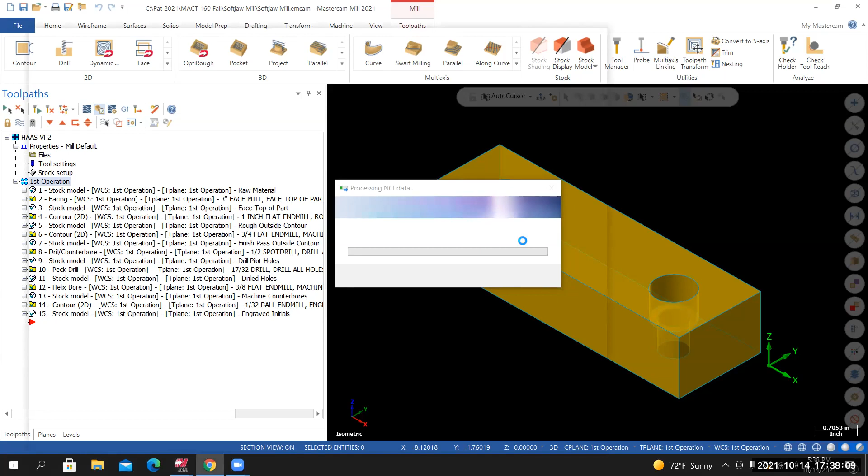I'll select Verify. Now, before you do that, make sure there's green checks next to everything. I'll run Verify. Takes a moment to open up. And once it opens up, we'll make sure that the stop condition collision is turned on.

And it's looking a little odd to me. Hold on one second, I think I'm frozen up. There we go. All right, so Verify has opened up. Make sure stop condition collision is turned on. I'll increase the precision a little bit. Just be aware that this can slow your computer down. I'll select play.

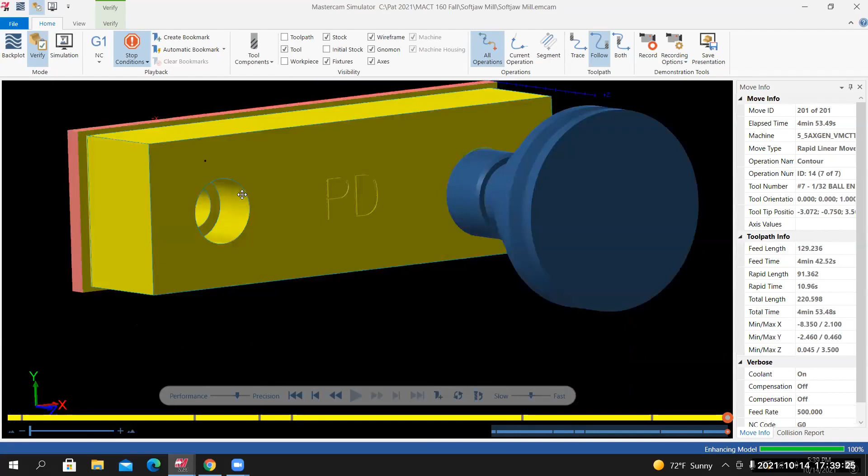Okay, so it appears as if we've got as far as engraving our initials in the part. What we'll need to do now, just at a quick glance, is break the sharp edges that we created with the toolpaths we've programmed. And we're also going to create a chamfer on this edge, the edge between the drilled hole and the bottom of the counter bore.

But before we do that, let's reference the project page and see what we're instructed to do. So under creating toolpaths, first operation, that's what we're currently working with, it says use the helix bore toolpath to create the 0.813 counter bores in the part. We've already done that. Step 9, use a contour toolpath to create the engraved initials. We did that. Step 10, use a contour 2D chamfer toolpath to create a 0.03 by 45 degree chamfer on the edge of the hole in the bottom of the counter bore. Okay, so that's what I was just talking about.

I'll go back into Mastercam. I still have Verify opened up, so I'll close out of Verify. We're going to create that chamfer. Now, this isn't called out on the blueprint, I'm just giving you instructions to do this. We're going to create a 30 thou by 45 degree chamfer on this edge and on this edge.

And we're going to use, let's check the tool list. We're instructed to use a 1/4 inch chamfer mill, 90 degree included angle, 2 flute. And they also identify the tool holder that we're going to use, and it's going to have a 1 inch tool projection.

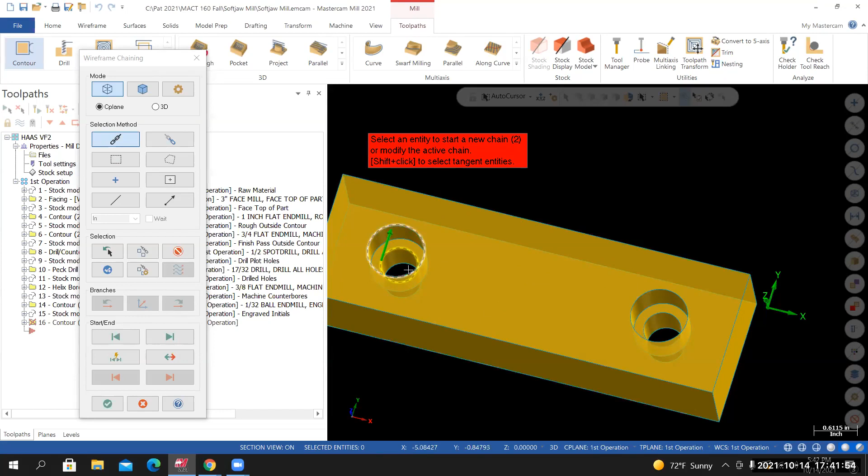I'm going to select this circle and this circle. I'm selecting wireframe geometry, and I will select it right around the 1 to 2 o'clock position, left click. Now, when we use a contour toolpath on what's referred to as an internal feature, a pocket or a hole, we want the chain to go in a counterclockwise direction. Mine's currently going in a clockwise direction. To change that, I'll use this icon here, reverse.

And then I'll come over here and I'll select this circle at around the 8 o'clock position. And then, because of the way I selected it, it is going in a counterclockwise direction. So I need both chains to go in a counterclockwise direction. Once I select the chains, I'll select OK, and that'll bring up the parameters for this toolpath.

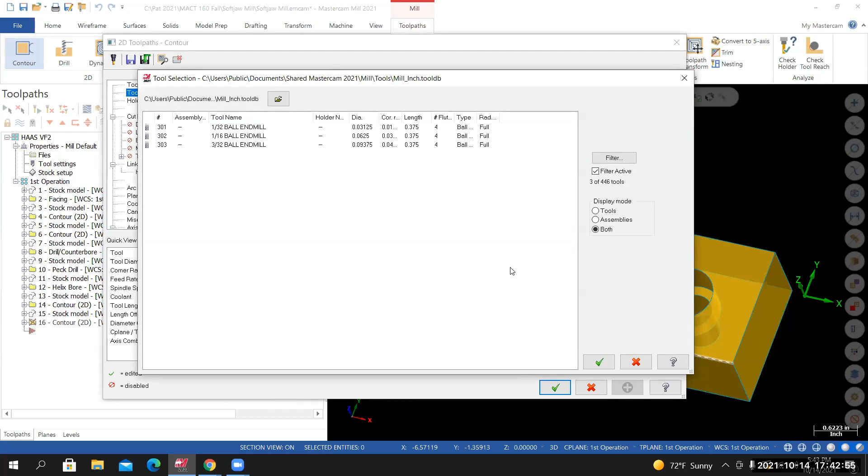We'll start by going to the tool list, so select tool. We're going to add that 1/4 inch chamfer mill to the tool list. So I'll select the select library tool icon. I'm sorry, Professor, I'm a little screwed up on the selection step. I'm not sure if I'm on the right level.

You're not sure if you're on the right level. The level doesn't matter, but what does matter is that the wireframe from solid level is visible. Can you share your screen with me? That was it, I had the wireframe from solid level invisible. Yeah, make it visible, and then you will be able to select those circles. I got it now, thank you. All right, perfect.

Okay, so select those 2 chains, and then once you select OK, it's going to bring you to the toolpath dialog box, and then go to the tool list. We're going to add that 1/4 inch chamfer mill to our tool list, so I'll select library tool.

My filter is still active from the previous contour toolpath where we created the initials, so I'll select the filter icon. This time I'll deselect all tool types and select chamfer mill. Now the chamfer mill upper right corner looks a lot like the center drill or spot drill, so select the chamfer mill.

For the tool diameter, I'll set it to ignore. I believe there's maybe 6 or 7 chamfer mills coming out of this library, so chamfer mill, ignore, will show us everything in the library. I'll select OK.

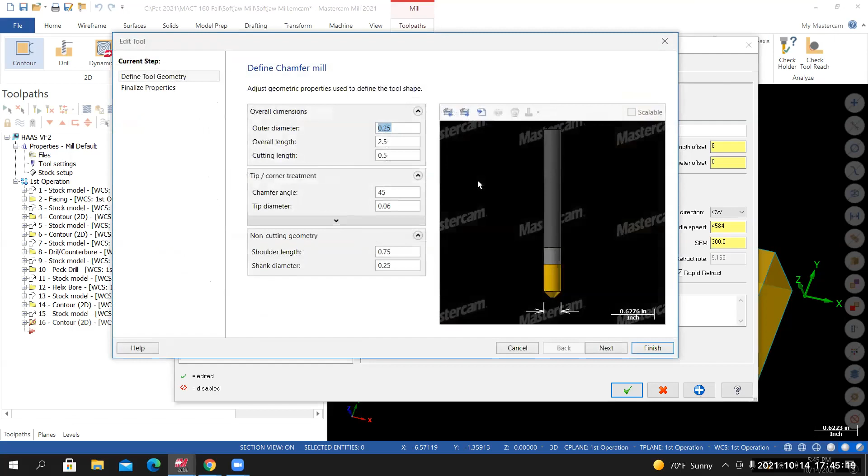Depending on the chamfer mill that you have, you're going to want to match the tip diameter to whatever the tool manufacturer you're using has. The ones I have at work, at a quick glance, look like they come to a sharp point, but if you look with a magnifying glass or optical comparator, there's around a 10 thousandths flat at the very bottom. So let's set the tip diameter in this particular case to 0.01.

At a quick glance it doesn't look like there's anything there, but if you zoom in you can see there's a small diameter at the tip. That'll be all the changes we make to this page. I set the tip diameter to 0.01. From here, I'll select next.

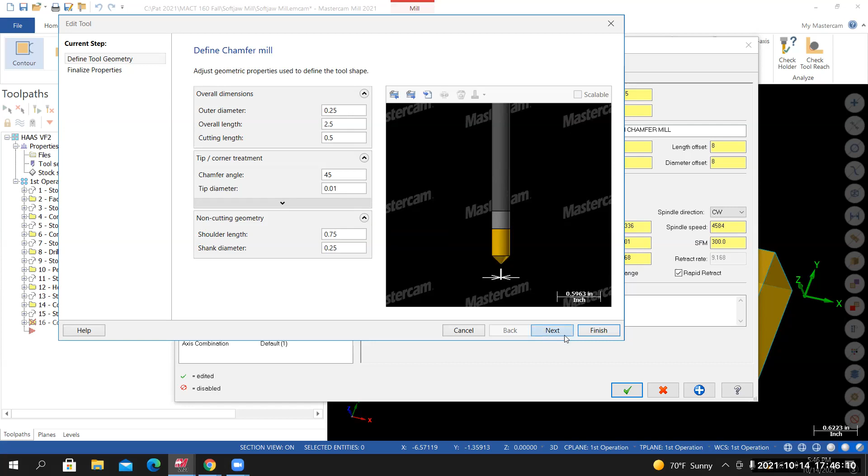According to the tool list in Canvas, this is a 2 flute, so let's set the number of flutes to 2. If I calculate the RPM, you can see that it maxes out at 10,000 RPM. That's the machine's limits, or the high limit for the machine.

From here, I'll select show more options. I'll select coolant, then set the flood coolant to on, and select OK. That'll pretty much complete everything I need to change on this page, so from here I'll select finish.

Now this spindle speed is not matching the one that we just calculated. I'll have to research that, but this will work. For the FPT, set this equal to 1% of the tool diameter. The decimal equivalent is 0.25. So 0.25 times 0.01, it's calculating my feed rate at 22.92.

Let's set the plunge rate to half the calculated feed rate, so 22.92, divide that by 2. I've got rapid retract selected.

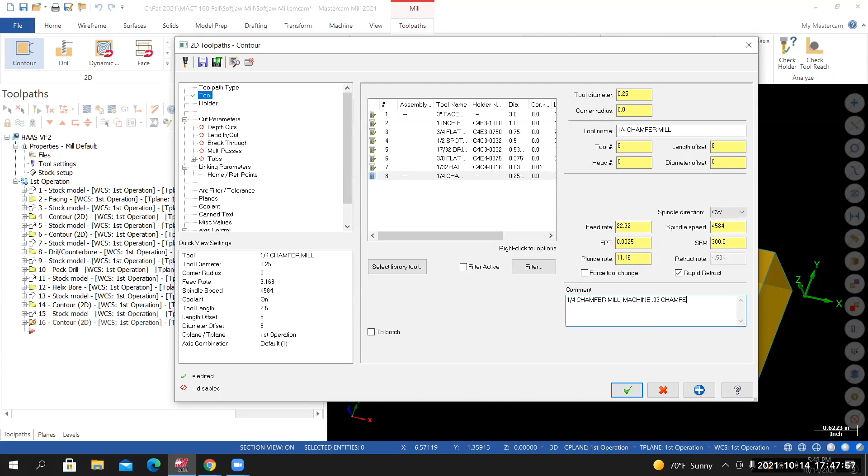In the comment field, I'll borrow the tool name, paste it down here. We'll say machine, all caps, 0.03 chamfer. Let me double check the instructions on that just to get the values correct. Yeah, so 0.03, that matches. That'll complete all the changes I need to make to this page.

From here, I'll go to the holder. This will be a Cat 40 ER32, so I'll open up the Cat 40 tool holder library. I'll select Open Library. CT40 inch, open it up.

According to the tool list, we're instructed to use C4C3-0032. And then we're also instructed to set the tool projection to 1 inch. That'll complete all the changes we need to make on this page.

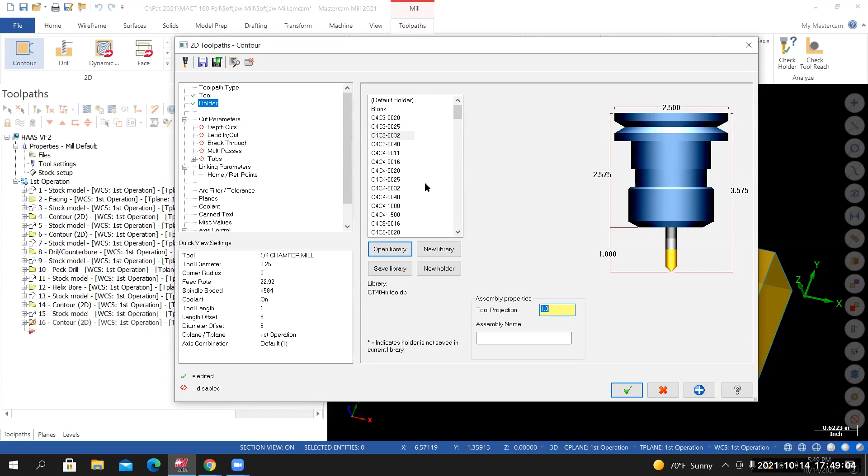From here, go to cut parameters. Compensation type, let's set it to... I'm sorry, let's set it to wear. Compensation direction would be left, so type is set to wear. Contour type, expand this menu, set it to 2D chamfer.

For the chamfer width, set this to 0.03. For the bottom offset, set this to 0.025. Now you got to be careful here, it's not 0.25, it's 0.025. So chamfer width is 0.03, bottom offset is 0.025.

I've got stock leave on wall set to 0. I have stock leave on floor set to 0. I'm not using depth cuts. Lead in, lead out, let's turn this back on.

And I've got mine set to the default values. I got 25% for the line in, 25% for the radius, and I have the same values carried over to the exit. These are my default settings.

Breakthrough, make sure that breakthrough is turned off. Multi-passes, we could use multi-passes, but I'm not too concerned about the surface finish on this. This is just clearance for the underside of a socket head cap screw, so I'm just going to leave multi-passes off.

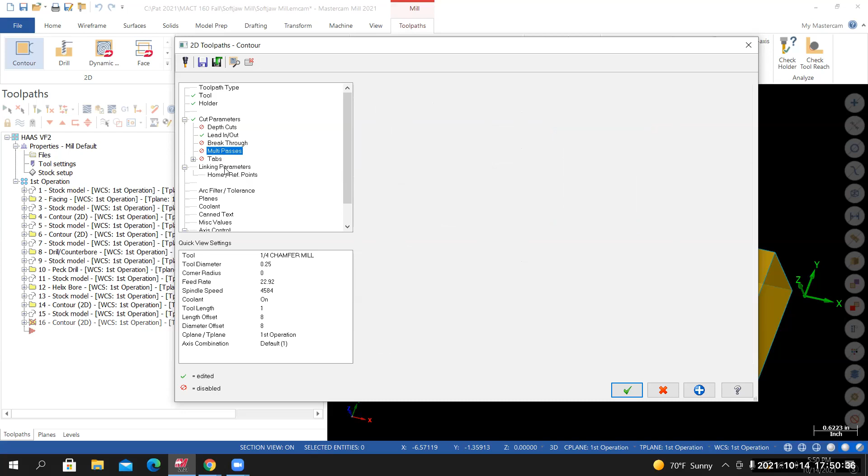I'll go to linking parameters. Now, most of these values are carrying over from the previous toolpath or the previous contour toolpath. I'm going to turn off retract, feed plane set to 0.1 incremental.

Top of stock. I'm going to set the top of stock... I'll select that. But actually what I'm going to do is set it to 0 incremental.

And then I'm going to set the depth to 0 incremental. What happens when we set both of these to 0 incremental is it uses the Z position of the geometry that's driving the toolpath to determine where it's going to position the tool in Z.

With that said, I'm actually going to activate retract again. We're inside of a pocket, and I want to make sure I'm well clear of it before I move over in the X and Y axis. So I've got retract set to absolute.

Select the retract icon, select the top of the part, and then add 0.25. I'll do that again: for the retract, set it to absolute, select the retract icon, and then pick something that represents the top of the part. That's 1.48 - select next to it and type in plus 0.25, hit enter.

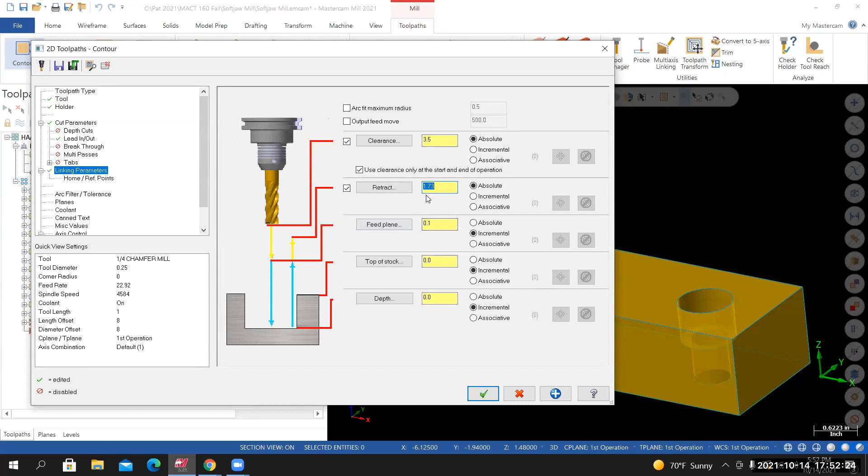Remember, this is an absolute value, relative to the current coordinate system. So when it retracts and repositions itself from one hole to the next, it's going to be at 1.73 inches relative to the current coordinate system.

So here, from here, we're good. Let's select OK.

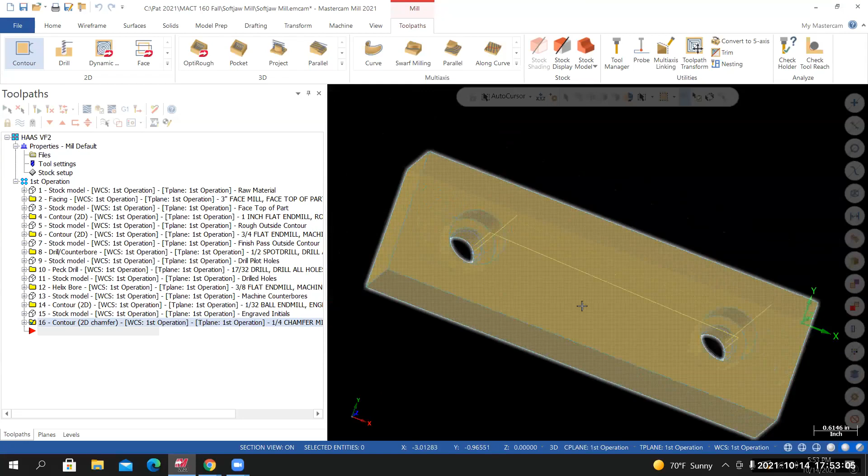I'm looking at the toolpath. We start here, we descend into the pocket, we have one pass around the bottom edge of the counter bore. It retracts, repositions itself to the second counter bore, descends, and then machines the chamfer. I don't see any issues with this toolpath.

The lead in and lead out, you want to make sure that's happening where there's no material, so it's on the inside of the hole - remember, we've already drilled this out. The same thing's happening over here. If you see the lead in and lead out arc move inside material, the chain is going in the wrong direction, and you'll have to flip a few things.

So from here, if I select just that toolpath, I select backplot. I can see the tool. I'll select play, speed it up a little bit. I think that looks good - I don't see the tool moving into the material. So from here, I'll exit out of backplot.

I can toggle up the display of this toolpath - I'll select this icon here, toggle display - looking at it from an isometric view, and I'll fit the screen. Now from here, make sure you save your work.

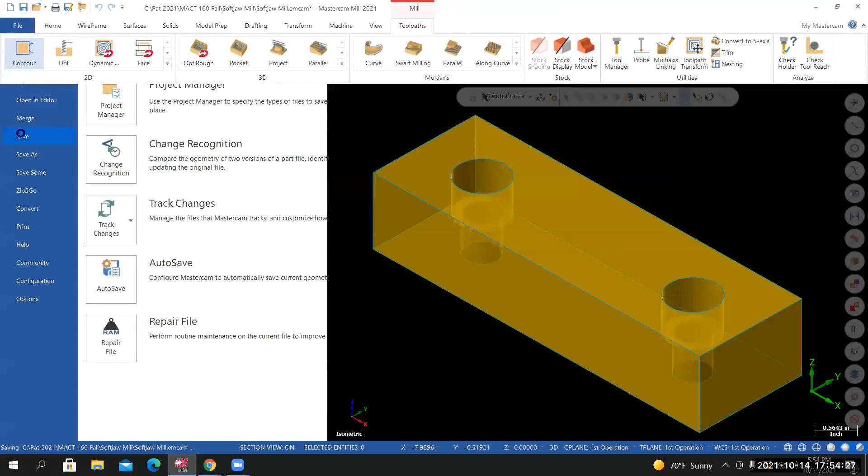We're going to run it and verify. I always recommend saving your work prior to going into verify. Select the entire first operation toolpath group and then run verify.

Stop condition collision is still turned on. I'm going to activate the color loop - that will assign different colors to the surfaces machined by different toolpaths. If I go to the verify tab, select the verify tab, and then select the color loop icon. From here, I'll select play.

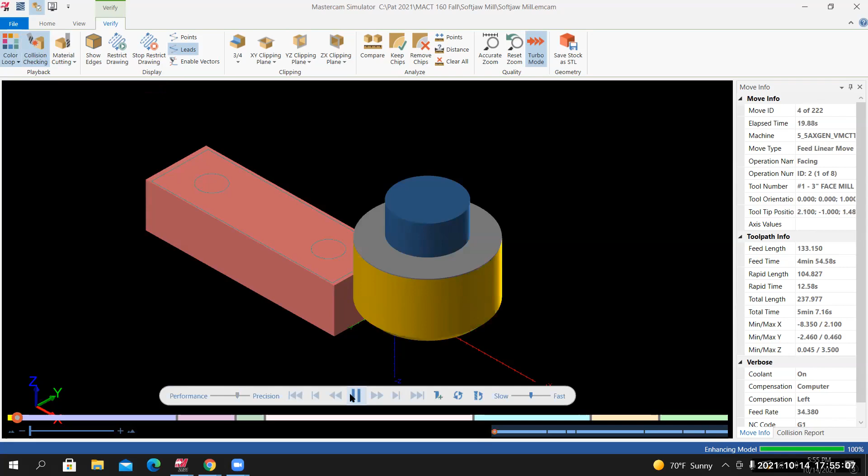Now, if I zoom in and tumble my view, into one of the counterbore holes, you can see that 30 thou by 45 degree chamfer at the bottom of the counterbore. That's what I want - that looks good, I don't have any collisions.

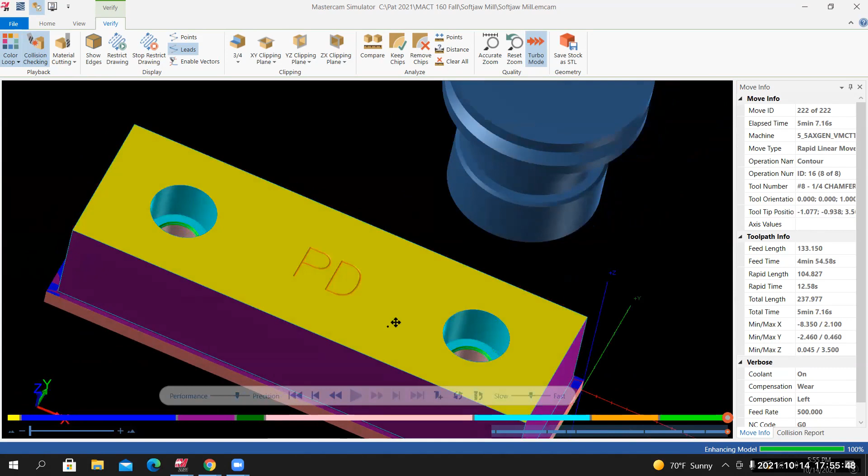The next thing we'll do is use a similar toolpath to break the sharp edges on the outer edges of the part and on the inside edges of the counterbores. So this looks good - I'll exit out of verify and save my work again.

So now that we've created the 30 thou chamfer at the bottom of the counterbore holes, let's create a stock model that reflects everything we've done up to this point. Once again, make sure the insertion arrow is at the very end of your toolpath group. Go to the toolpaths tab, in the stock section, select stock model.

Let's start by giving it a name. We'll call this 0.03 chamfers.

For the initial stock shape, I'm using a stock model - let's create the stock model, or the last stock model we did prior to this toolpath. It'll be the engraved initials. From here, go to the source operations, and I'm going to select the contour toolpath we just created - this is the 2D chamfer toolpath. I'll select OK.

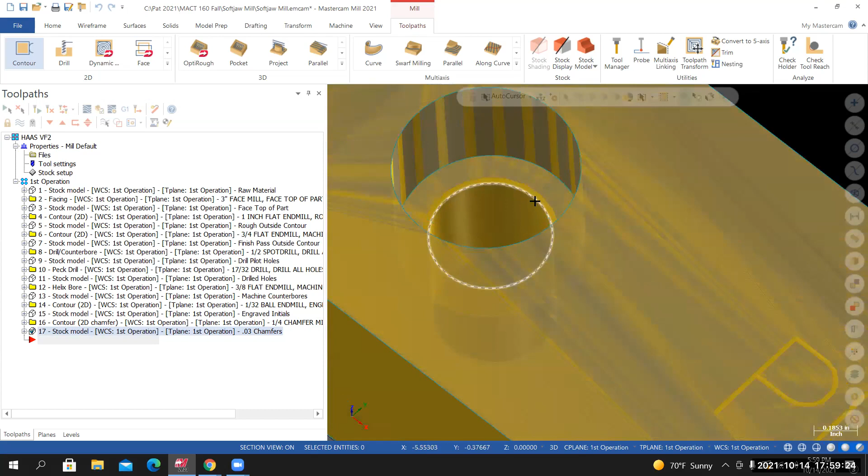Now, as the stock model starts to get closer and closer to the solid model or the finished model of the part, it becomes difficult to see what's actually going on with the stock model. This one's taking a moment.

If I zoom in, I can almost see the chamfer, but just to be safe, I'll go to the levels manager and make the solid model level invisible. Now if I zoom in, you can see the chamfer - I got the 30 thou chamfer on the edge.

And this is what we're actually going to see at the machine after that chamfer mill machines those chamfers. So once you verify that the stock model is correct, I'll make the solid model level visible again, and make the stock model level invisible, toggling the display of the stock model off.

I'll save my work, go back to the project page, and let's see what we're instructed to do next.

Step 10, or actually we're moving on to step 11: use a contour 2D chamfer toolpath to break all sharp edges created by the first operation. So everything we did so far is considered the first operation.

What I'm going to do is copy the chamfer mill operation that we just created, and make a few changes to it so that it works for all the sharp edges that we want to break.

Back inside of Mastercam, left click on the contour 2D chamfer toolpath that we just created. Make sure that you only have a green check next to that toolpath. Once you have it selected, right click on it.

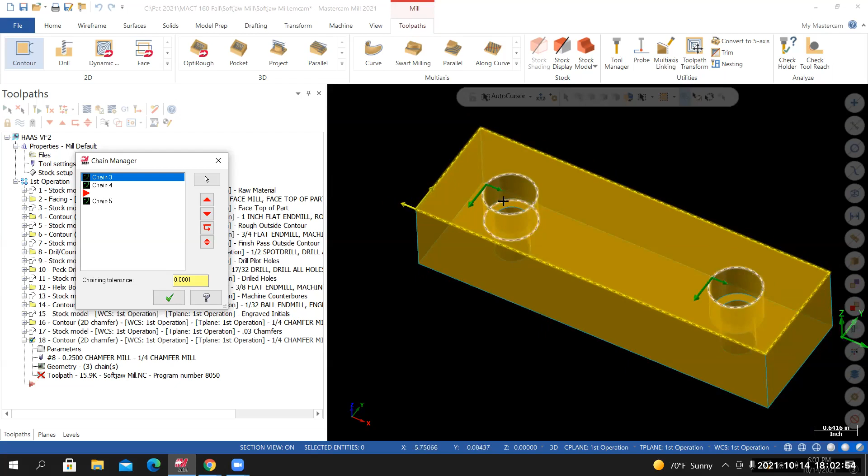So for the external feature, we want the chain pointing outboard. And for the two internal features, we want the small arrow pointing inboard. So mine are correct. From here, I'll select OK.

Now we're not seeing anything because we're modifying an existing toolpath. We already updated the geometry, so go to parameters, then linking parameters, then cut parameters.

Where it says chamfer width, let's reduce this. We're just breaking the sharp edge. We don't want to put a large chamfer on the edges that we have selected. So set this to 0.01.

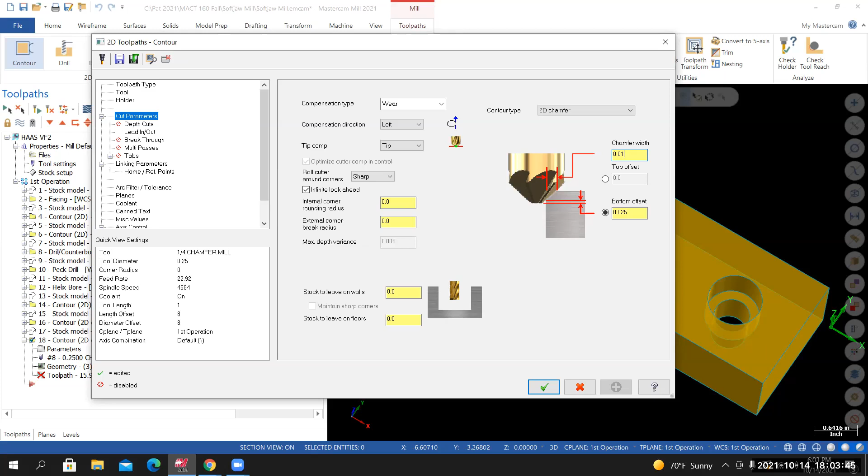And that should do it. If I go to the linking parameters, you see how these are set to 0 incremental for both the top and the depth. Once again, it's going to reference the selected geometry that's driving the toolpath. Once we selected the new geometry, that hasn't really updated, but because of these settings, the new geometry will work just the way it is. It's going to reference the Z position of the newly selected geometry.

From here, I'll select OK. I'll need to regenerate this toolpath, so I'll select regenerate all dirty operations. In this case, that'll work. Once it regenerates with just that toolpath selected, run backplot.

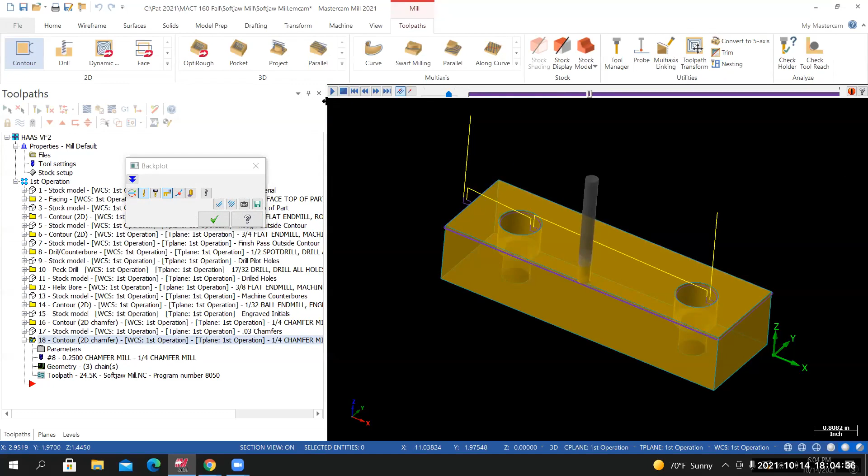Once again, you want to make sure that the tool is on the correct side of the feature that's being machined. From here, I'll exit out of verify and save my work.

Looking at it from an isometric view, zooming out a little bit, I'm going to select the entire first operation toolpath group. Now, the one thing that we're going to do after we verify this or run these toolpaths and verify, we're going to save that machined model as an STL file. And that's going to become our stock for the verify of the second operation.

So all toolpaths are selected. I'll select verify.

So when I go to hit backplot, it is bringing up all the operations when I only have number 18 selected.

So toggle off all display, toggle off this icon right here, and then select just that last toolpath. Got a green check next to just that one, right?

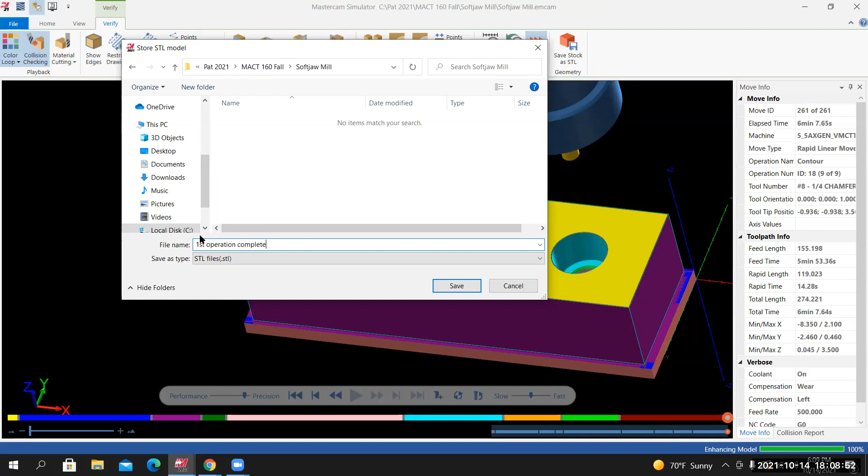I'll select save. Now this will sometimes take a moment, so be patient. It's going to create the STL file, and once we have the STL file created, we can reference or import it for the stock for the second operation verify. I'll show you how to do that here in a moment.

All right, so once it's done saving, you can exit verify. That completes everything we need to do for the first operation.

If I go back to the project page, let's see here. It says we just completed step 11, step 12: create the NC file using the post selected operations icon, and then create the STL file that reflects all the toolpaths from the first operation. This file can be used in verify for the second operation.

So we jumped ahead to step 13, and I'll need to make that change. That's actually step 13. Let's backtrack and create the NC file.

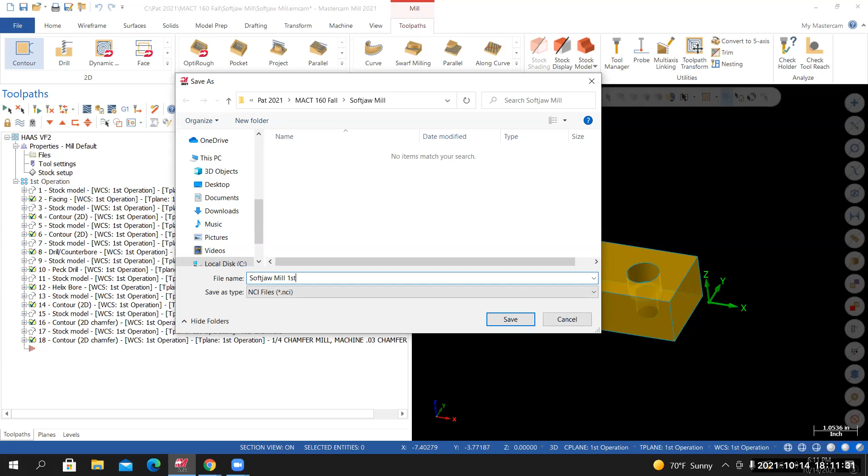And then I'll name the NCI file, well that was the NC file, so I'll name the NCI file and NC file the same way. So Softjaw Mill first operation.

And once you save the NC file, it's going to open up Code Expert, and we'll see the NC file, which basically converts these graphical representations of toolpaths to a language that the machine will understand, G and M code.

So we'll call this 8050, and I'll take note of this because for the next ones, we're going to call it 80. This is 8050. We'll make the second operation 8051.

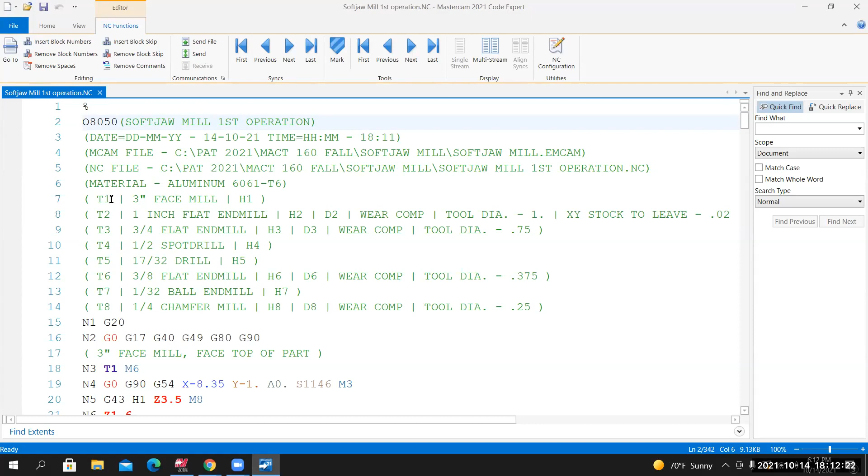So from here you can scroll through the code. This is the language that the machine understands and will basically be used to machine the first operation of the mill Softjaw. So from here, I'll exit out of the Code Expert.

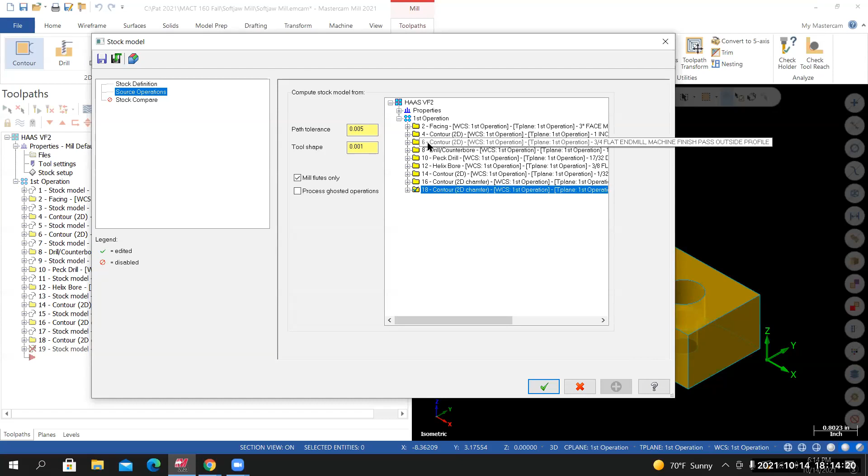Let's create the stock model that shows the first operation completed. So insertion arrow at the very end of the toolpath group. In the toolpaths tab, go to stock model. I'll call this one first operation complete. For the initial stock shape, let's use the last stock model that we created, which is the 0.03 chamfers. And for the source operation, select that chamfering, the last chamfering operation that we created. Select OK.

You zoom in, you can barely see the chamfers through the solid model. What I'm going to do is look at it from an isometric view and fit my screen.

What we're going to do, first off, let's visualize this part sitting in the vise. We're holding onto this gray area, which is the excess material we're holding onto from the first operation. What we're going to do now is flip the part over. This face that my cursor's on is going to go on top of the parallels, into the vise, down. We're going to clamp on this face and this face, and the material that needs to be removed will be facing up. So we basically got to flip the part over.

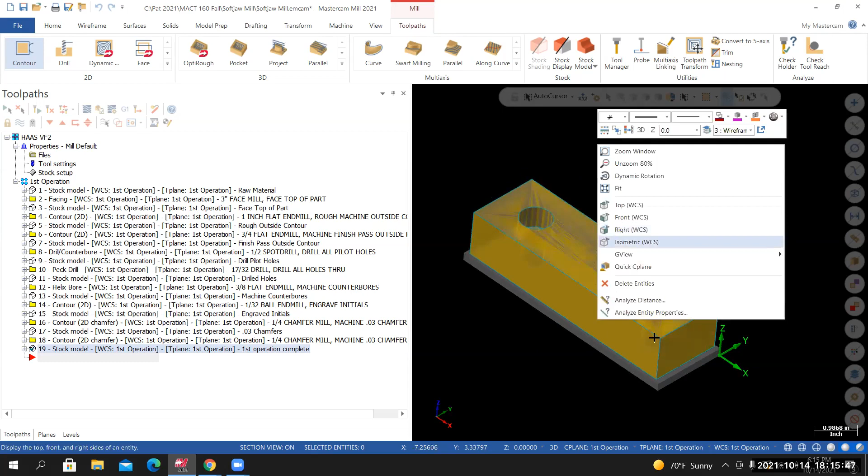This is what I want you to do: look at it from an isometric view, zoom out a little bit. We're going to rotate this about the y-axis, pivot about the y-axis. Hold the Y key down, then hold your scroll wheel down and move your mouse. I'll do that a couple different times.

We're tumbling the view, not the part, so that the material that needs to be machined is facing up. The old coordinate system is now upside down, at the upper left side of the new orientation, and that's what I want. I'll do it one more time: from a default isometric view, hold the Y key down, press the scroll wheel down on your mouse, and move the mouse. It's rotating the view about the Y-axis. Now the coordinate system should appear at the upper left corner, and the Z-axis is pointing down. So we've basically flipped the part over.

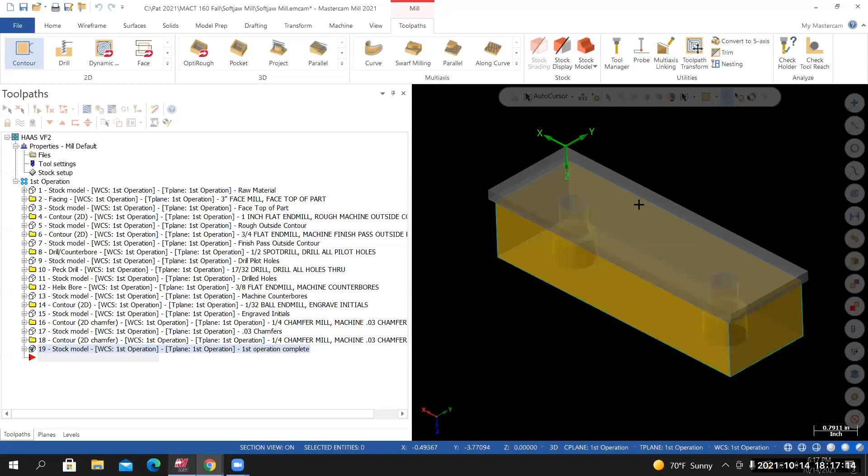You need to visualize unclamping the vise, flipping the part over 180 degrees, and then clamping it down again. We're going to need to create a new coordinate system. If I go back to the project page, let's see here: turn part over. Yep, so we're still on step one. I no longer need to see, I guess I could keep it visible, the stock model.

Let's create a new coordinate system and we'll call it the second operation. Go to the planes manager. To create a new plane, select the green plus sign to create a new plane, and from the drop-down menu select from solid face. Mastercam is prompting us to select a flat solid face. Select the top face. I'm selecting it right here, and you'll see that coordinate system appear.

You could scroll through the different options. Z will always be perpendicular to the selected flat face, but the first option is the one that's working for me, so I'll select OK. That brings up the parameters for the new plane we just created. Call this one second operation.

Don't worry about the origin. I'm going to move this to this corner. I want the coordinate system on machined surfaces or machined edges.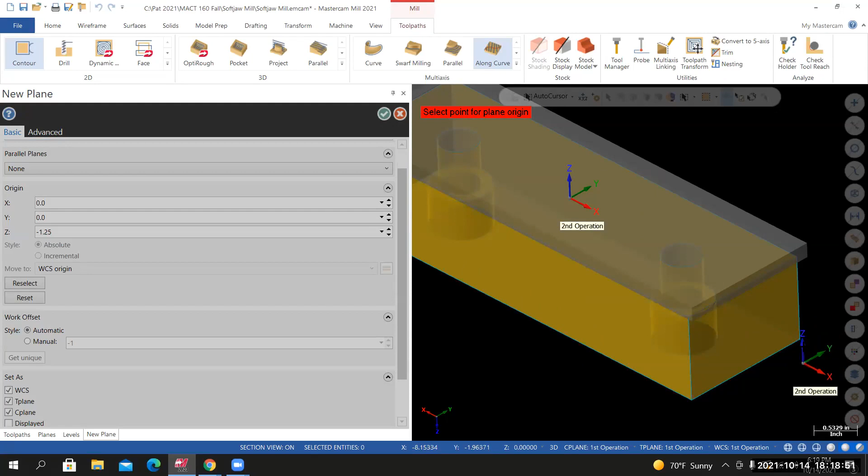So we're still in the parameters for the new plane. Select, reselect. When you move your cursor to the graphics area, you'll see the coordinate system attached to your cursor. I'm going to let my cursor lock on to this edge or this endpoint right here. When I see it snap into position, left click.

So now you can see positive X is going to the right, positive Y is going forward, and positive Z is going up. That's the orientation or the direction of our axes on our CNC mill.

From here, I'll save my work. And I'll go back to the project page.

So now we're moving on to step 2. It says create a new toolpath group and name it second operation.

I'll go back into Mastercam. Go back to the toolpath manager. Now, the toolpath manager is getting a little cluttered. We have a lot going on.

So once we're done with the first operation toolpath group, we can minimize it. If we ever need to get access or get back to the existing toolpaths, we can just expand it. But for the time being, I'm going to minimize it.

Now we're going to create a new or a second toolpath group. Be careful, because you can create toolpath groups within toolpath groups. That's not what we want to do right here. We want to left click on the machine group.

Machine group is a selected item, the Haas VF2. Then right click from the file menu, select groups, new toolpath group. And then name it second operation.

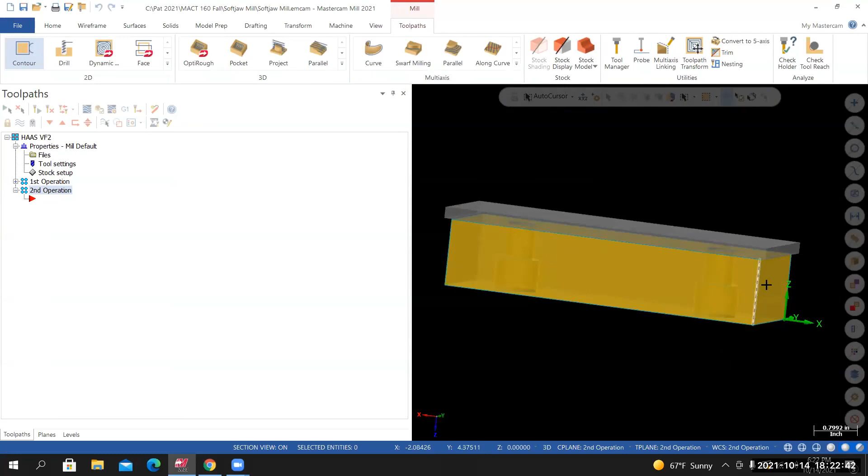So let's do this. We used a contour toolpath. We had a dedicated roughing toolpath where we use that 1-inch flat end mill. I'm going to remove this material, and I'm not too concerned about the surface finish, because everything that's in gray, everything that you're seeing above the part right here is all going away. We're machining all this away. I'm not concerned about the surface finish.

So what I'm going to do is copy a toolpath from the first operation toolpath group. Now we need to be careful when we do this. I'll expand the first operation toolpath group.

The contour toolpath, where we have the 1-inch flat end mill—this is the one that we're copying. So select the contour 2D with the 1-inch flat end mill. I have a green check next to just that toolpath.

Right click on it, copy. Be careful, do not cut. Right click, copy. Go down to the second operation toolpath group, right click, paste.

And I'll minimize the first operation again. I'll end up going back to it, but for now I'm just minimizing it. I got this copied toolpath, and we're going to need to change several things.

The first thing I would like to change, if I expand it, is what tool plane this copied toolpath is currently referencing. I'm giving you a hint—it's referencing the first operation. We need to change the construction plane. I'm sorry, we need to change the tool plane that this toolpath is referencing. Right now, the Z would be coming from underneath the part, the wrong direction.

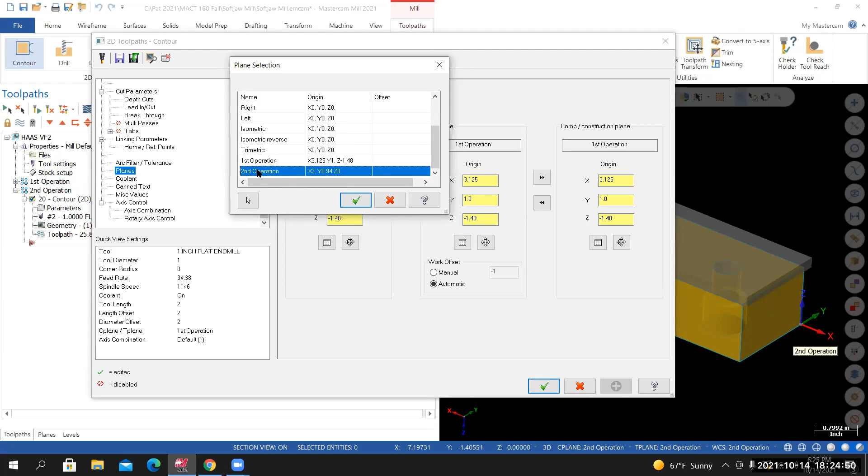Yeah, so mine's at the bottom. Select the second operation. When you select it, you see it become visible over here. So select the second operation, select OK. And now I'd like to carry this over to the tool plane and to the construction plane, so I'll select this icon and this icon.

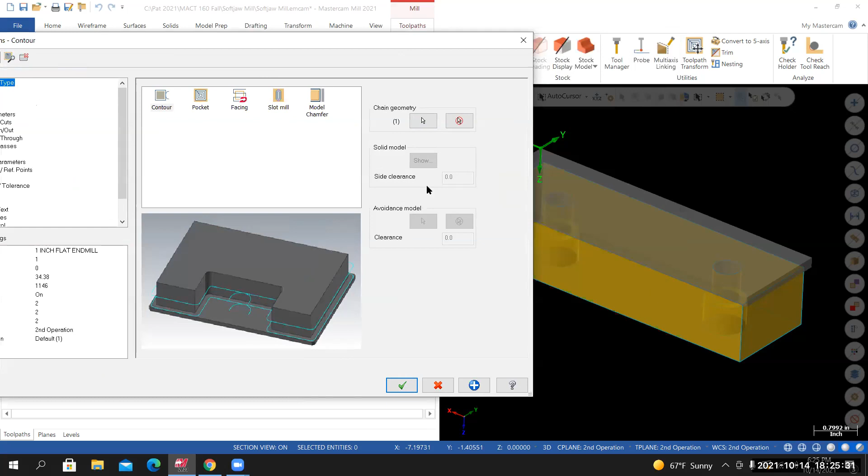From here, go up to toolpath type. We can access the chain geometry while we're inside of the parameters for the toolpath from the toolpath type page. So where it says chain geometry, if I select it, it brings up the chain manager.

Now remember, this chain is from the first operation. So what I'll do is I'll right click in this field, rechain all. I'm tumbling my view. And I'm going to select this edge right here so that the chain's going in a clockwise direction.

I'll select OK. The large arrow shows us the direction of the chain. The small arrow shows us which side of the chain the tool is going to be on. So I'll select OK.

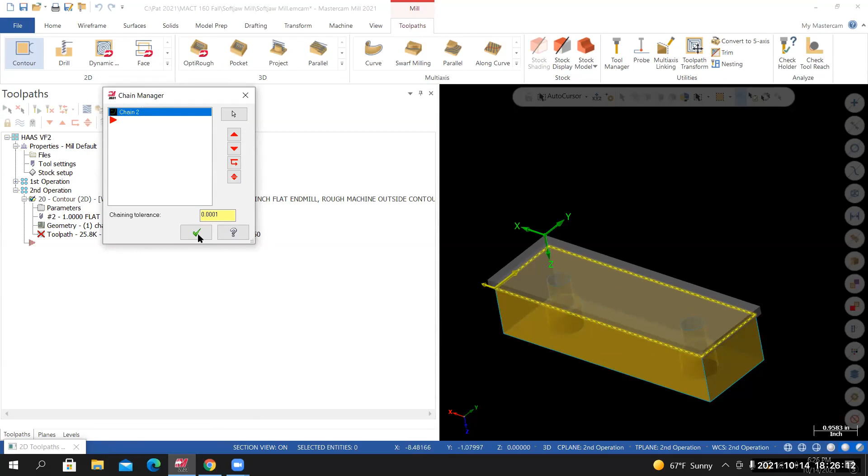And let's see here, let's go down to cut parameters. I'm leaving 20 thou on the wall. That's fine—all of this is getting machined away anyway.

Depth cuts, don't need it, so we'll turn it off. Lead in, lead out, the 25% default should work just fine. Breakthrough will probably be fine because we left 20 thou on the wall.

Multi-passes, don't need it. Linking parameters, we need to change something here, and remember these values are relative to the current coordinate system. Something's looking odd to me. Hold on. All right, it's all good.

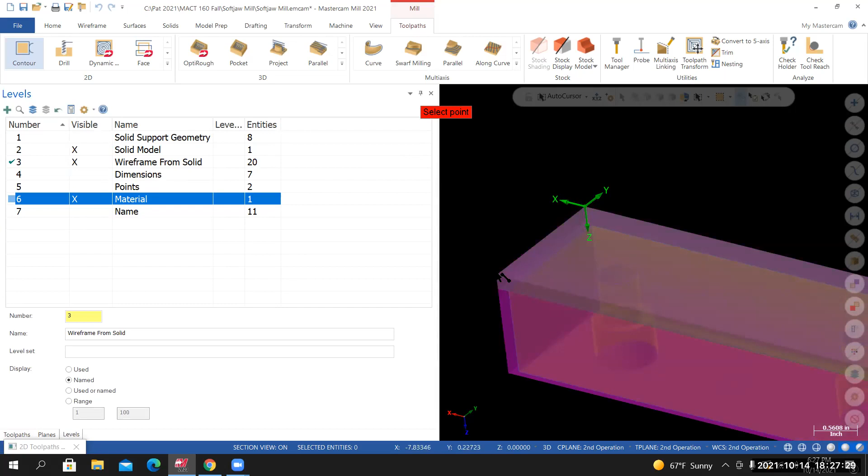So linking parameters, top of the stock. I'm going to select - it's not letting me select anything because we cannot select a stock model edge. So what we have to do is go back to levels, make the material level visible, lock on to what's now considered the top of the part. Once we flipped it over, this is considered the top of the part. So select it, and then for the depth, I'm selecting the top of the part now.

So I've got 1.48 for the top of the stock absolute, and then for the depth, I've got 1.25 absolute. That should take care of all the changes. Now remember, this is a copy toolpath, so a lot of the stuff has already been defined. From here, I'll select OK.

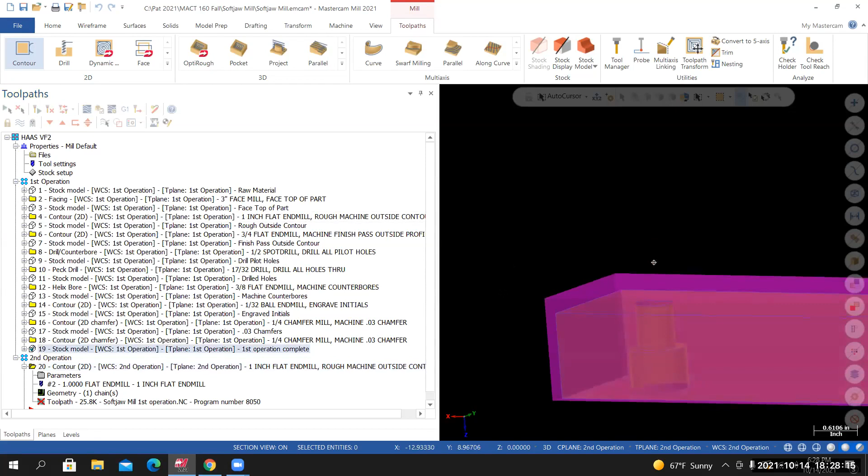I no longer need to see a stock model from the first operation, really don't need to see the material level. I'll need to regenerate this toolpath since we made some changes to it. We now have a red X next to it, so I need to regenerate all dirty operations.

Let's see what this toolpath looks like in backplot. I've got the toolpath selected, I'll select backplot. We're doing one pass at one depth of cut. If I select play, this is what we're getting.

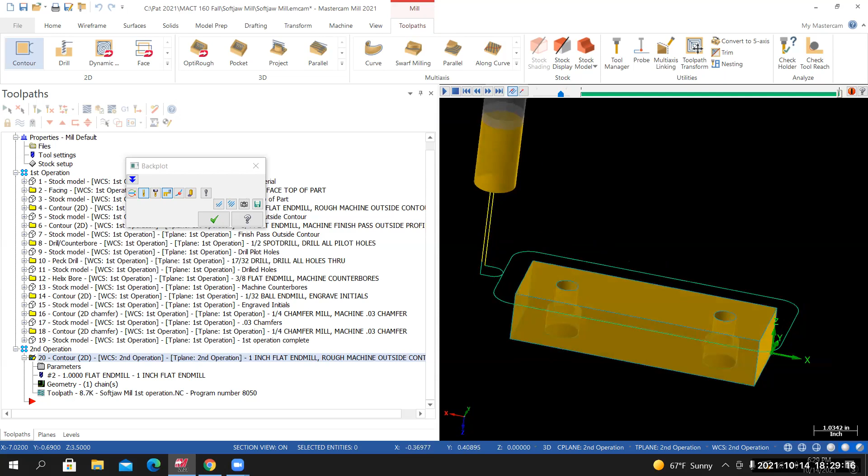It's just knocking off that overhanging material. That way, when we come by with a face mill and machine away the face, nothing has a tendency to overlap or get hung up and tear away as the face mill is cutting through it. This overhang wasn't that much, so it might not be a problem, but I'm just going to err on the side of safety with this.

So I machined away the extra material that was overlapping the finished walls. I'll toggle off the visibility of the new toolpath.

Before I run verify, I need to update my stock setup. Go to stock setup - stock plane should still be set at the top. This time, instead of a solid, remember for the first operation we had that solid we created, our material representation, so the majority of that has been machined away now. So what I want to represent the stock for the second operation is that STL file we created that reflects all of the machined operations from the first operation.

So let's go to File, select this icon here. Now we're going to navigate to wherever you saved that machined STL file. I'm going to go to my C drive, and I'm looking in this MACT folder. I've got a project folder called Softjaw Mill, and then I have the first operation complete STL file. I'll select OK.

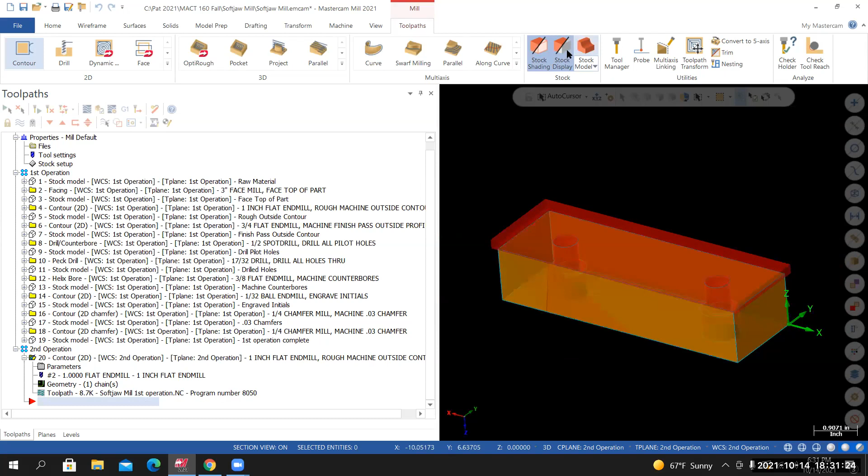Once I verify that it's correct, I'll toggle off the display and save my work. Now I'm going to run just the second operation in Verify. You'll notice that none of the toolpaths from the first operation are selected - I'm just verifying the second operation. So I'll select Verify.

You can now see what the part's going to look like in the vise before we do any machining for the second operation. Make sure stop condition collision is turned on and then run it.

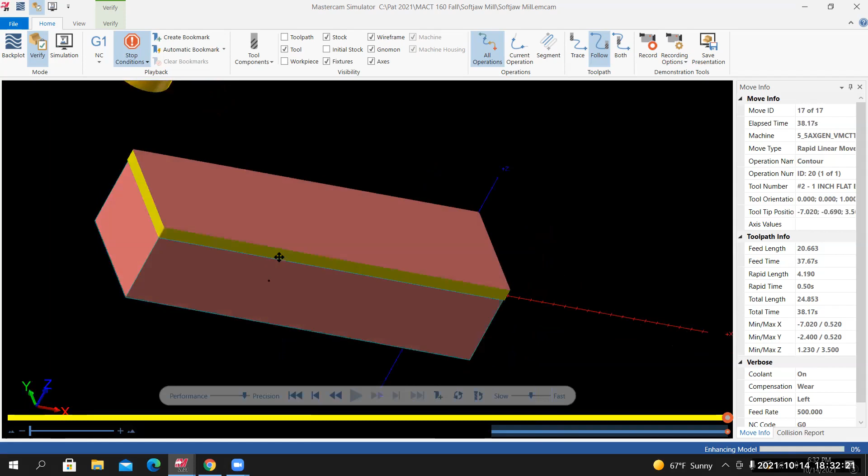All we did is knock off that overhanging material. You can see that the tool did not come into contact with the finished surface or this machined surface from the previous operation. If it was undercutting, we'd have to make some changes, but everything looks good. So from here, I'll exit Verify and save my work.

We'll need to create the stock model that reflects everything up to this point. So once again, insertion arrows at the very end of your toolpath group. Toolpath tab, in the stock section, select stock model. For the name, let's call this second operation contour.

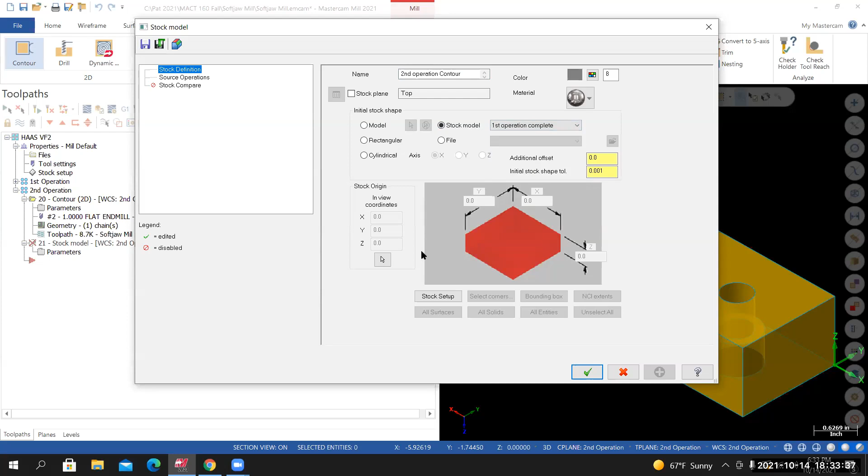For the initial stock shape, we're going to use the first operation complete stock model. And then for the source operation, let's select the contour toolpath that we just created. Select OK.

So this is what the part's going to look like in the machine once this contour toolpath is finished. We're now going to come in with a face mill and machine away the excess material down to the top face of the part.

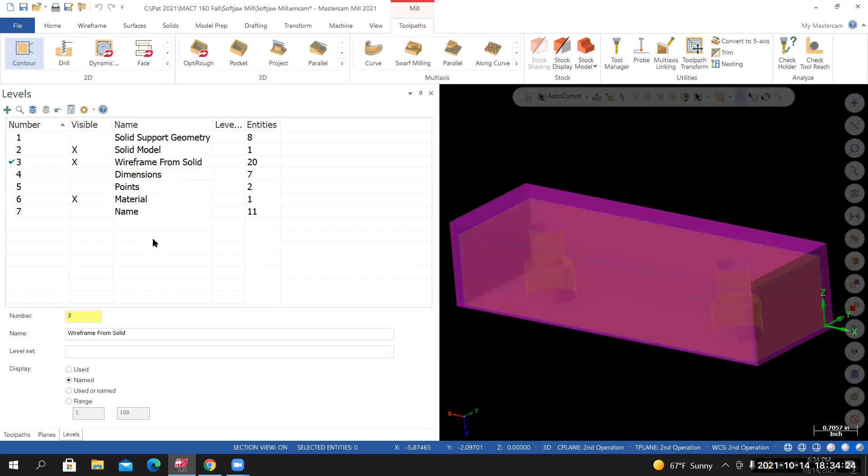So once you verify that the stock model is correct, you can toggle off the visibility of it. I'll go to the level manager, make the material level visible. Go back to the project page. And we've moved on to step 4.

Use a face toolpath to machine the part to the finished thickness. Okay, I've already got a facing operation, so once again, we can copy and paste an existing toolpath.

So I'm back in the toolpath manager. Minimize this, minimize this. The insertion arrow is at the very end of the second operation. I need to borrow something or copy something from the first operation. So I'll expand it, this facing op.

Make sure that that is the only item selected. There's a green check next to just the facing operation. With just that operation selected, right click on it, copy. And minimize the first operation next to the insertion arrow. The very end of the second operation, right click and paste.

If you need to expand the new facing operation, the first thing that I would like to change will be the tool plane. Expand the parameters, select planes. You can see that this toolpath is referencing the first operation. So I'll select WCS plane, this icon.

Change over to the second operation, and then carry it over to the tool plane and carry it over to the construction plane.

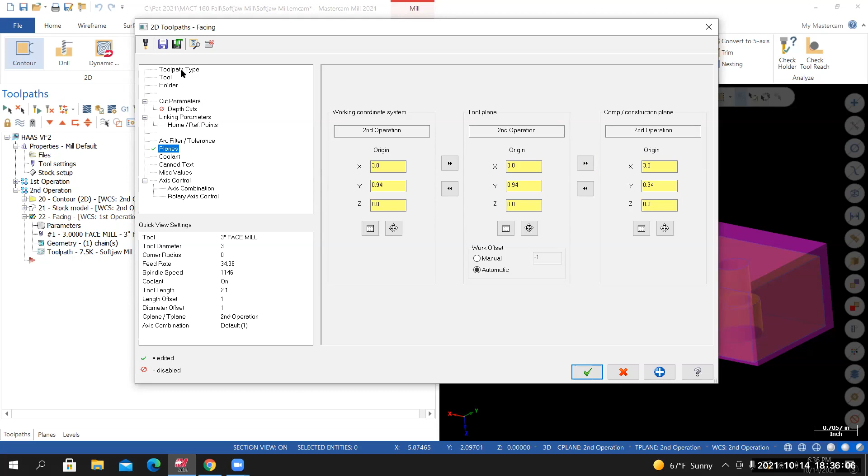I'm also going to reselect the chain that's driving this facing operation. So I'll go to the toolpath type, I'll select chain geometry. Now the chain that's currently driving this toolpath is on the bottom.

I'm just going to change it so it's on the top. Right click, rechain all.

Change over to a solid chaining method. I've got C plane selected. Selection method is set to loop and to face. Select the top of the material.

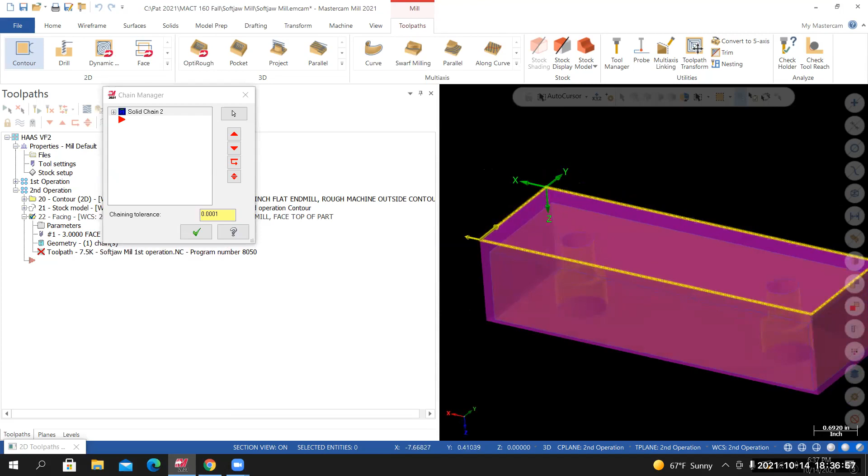Chain's going in a clockwise direction. That should be fine. From here, I'll select OK. Chain's going in a clockwise direction. You can see that the small arrow is pointing outboard. That's what I want. So from here, I'll select OK.

For the tool, now remember, this is a copy toolpath. Things that we'll need to change. Go to cut parameters. All of this is good.

Depth cuts. Now on the first operation, first facing operation, we only took off 20 thousandths off the top of the part. We need to take a lot of material off. So if we do this in one pass, the tool's gonna be working too hard. So let's activate depth cuts and set the max rough step to 50 thou.

And then set the number of finished cuts to 1 and set the finished step to 0.02.

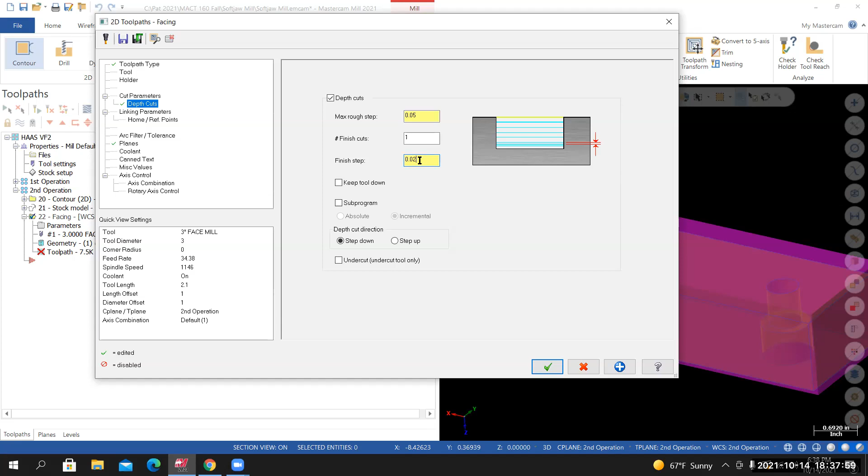From here, go to linking parameters. Clearance should be good. Let's set the retract to 1.5 absolute. Feed plane is 0.1 incremental. That should be fine.

Top of stock, I have it set to absolute. I'll select the top of stock icon. I'll let my cursor lock onto the top of the part. For the depth, I have it set to absolute. I'll select the depth icon. And now I'm going to zoom in and lock on to the top of the part.

So my bad, I might have said top of part for the top of the stock. So top of stock, locking onto the top of the material. And then for the depth, I'm locking onto the top of the part. From here, I'll select OK.

I'll need to regenerate this toolpath. And it says one or more selected operations is dirty and may require—yeah, I selected the wrong, I selected the back plot. So select regenerate all dirty operations. And now it just said toolpath selected. I'll run it in back plot.

I don't like how it's repositioning itself. So let me check on something. If I go back here, parameters. Let's see here.

Retract, I'm going to change this to 2. Cut parameters should be 1 pass. I'll regenerate that and run it in back plot again. That's better.

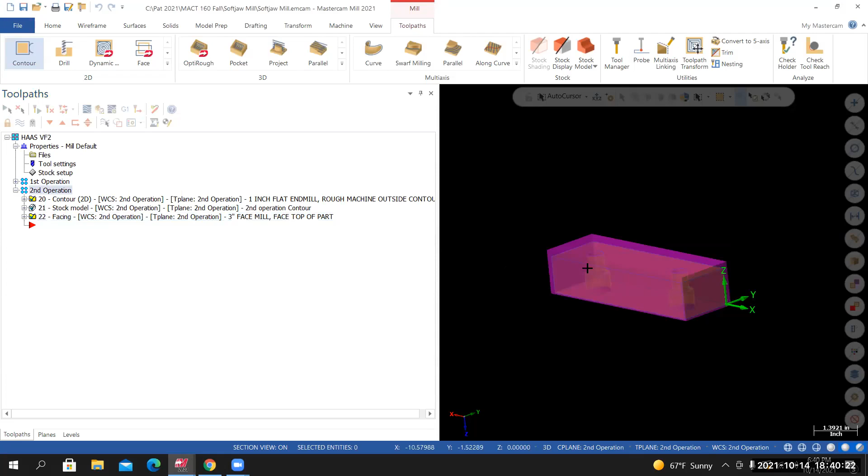From here, I'll save my work. I'll select the entire second operation toolpath group and I'll run it and verify. Make sure stop condition collision is turned on, and then I'll select play.

Once it's done running and verify, I'll zoom in, I'll inspect the model. Now, everything—all the machined edges, machined faces should line up with the wireframe representation of the part. So for the most part, this part is complete.

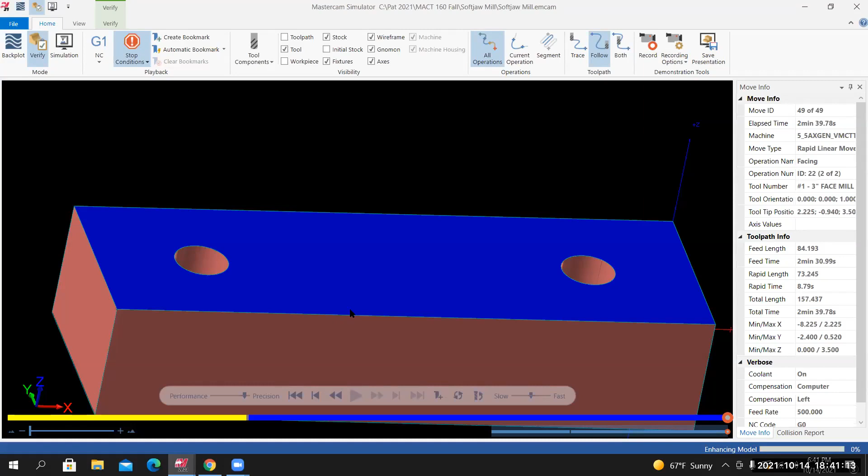But what I'd like to do is use a chamfer mill to knock any sharp edges off created from the second operation. So that's what we'll do next. So from here, I'll exit out of verify.

I no longer need to see my material level, so I'll go to level manager. I'll turn the material level off. I'm looking at it from an isometric view. I'm fitting my screen, I'll zoom out a little bit and then I'll save my work again. Now ready to create the next toolpath.

Now that I've completed the facing operation for the second operation, all I need to do is take off the sharp edges created from all of the machining operations. But before I do that, let's create the stock model that reflects everything we've done up to this point.

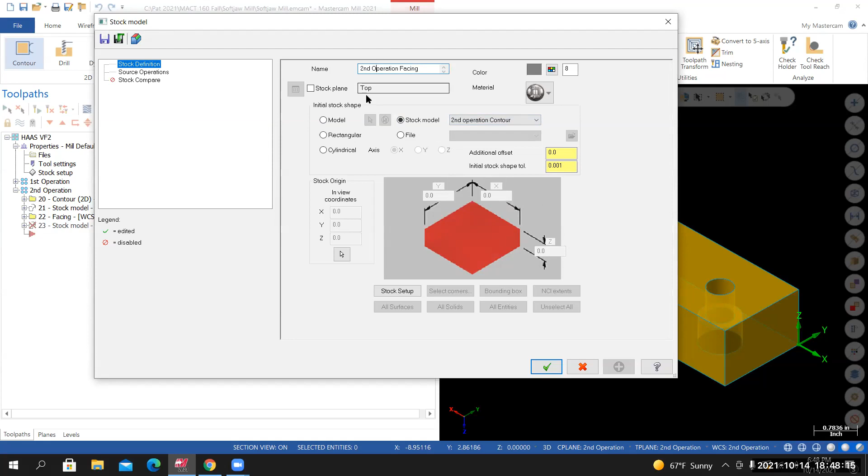Insert the arrow at the very end of the second operation toolpath group. Go to the toolpath tab, stock section, stock model. I'll call this second operation facing. For the initial stock shape, let's use the stock model from the previous op, so the second operation contour. For the source operation, select the facing operation we just created. Then select OK.

You can barely see the stock model, but it pretty much matches the solid model that represents our part. Once you verify that it's correct, toggle off the visibility of it.

I'm going to reference the project page. Step 5: use a contour 2D chamfer toolpath to break all sharp edges created by the second operation. We've already got a toolpath that did that for the first operation, so once again we're going to copy and paste.

I'll expand the first operation. Now be careful, we've got two contour toolpaths with two chamfering operations that have different chamfer sizes. I'm going to copy the one that has the smaller chamfer.

I just noticed I didn't update the note for this contour, so I'm going to do that real quick. This is the second chamfer operation, where we're creating the smaller chamfer. So go into the parameters under tool, and instead of saying quarter-inch chamfer mill or something like that, I'm going to say BREAK ALL SHARP EDGES, all caps.

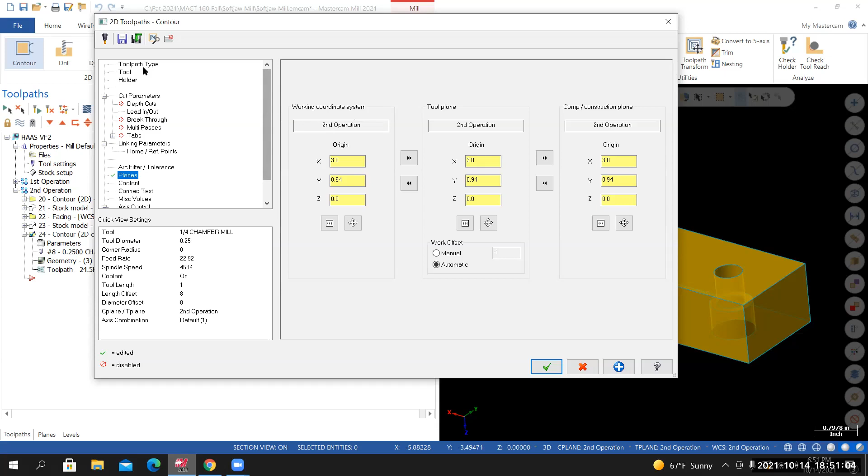Let's start by changing the WCS to the second operation. I'll select WCS plane, second operation, then carry it over to the tool plane and the construction plane. Go up to the top where it says toolpath type, and for the chain geometry, I'll select chains.

You can see that the current chains populating this field are for the previous operation. So I'll right click in this field and select rechain all, which brings up the solid chaining dialog box. I'm going to change over to wireframe chaining by selecting this icon. C plane is selected, and the selection method is chain.

I'll select the outer edge of the part here, then select this circle around the 7 o'clock position. It's going in the wrong direction, so I'll flip it. Then I'll select this one around the 3 o'clock, or 2 o'clock, I should say. Once all three chains are selected, I'll select OK.

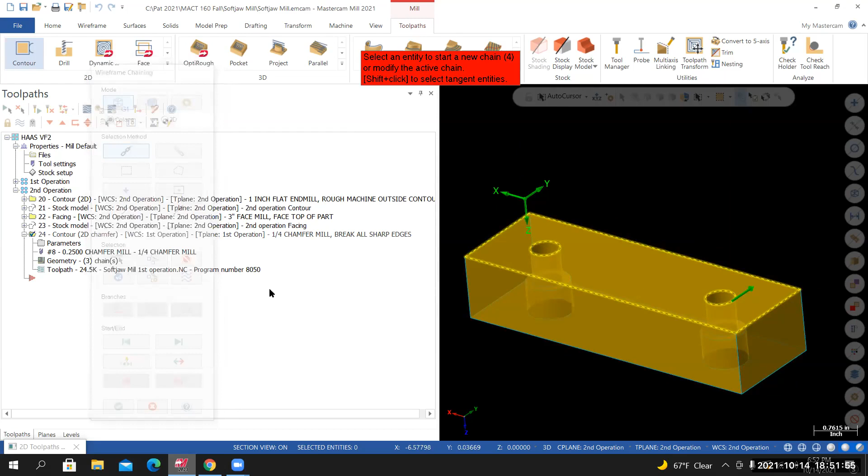This brings up the chain manager again, where you can double check that the chains are going in the right direction and the tool's on the right side. Everything here looks correct, so I'll select OK. I don't think I need to change anything else. The note: a quarter-inch chamfer, break all sharp edges, second operation.

Something we might want to check is the linking parameters, and relative to our current coordinate system, these should work just fine. From here I'll select OK. I'll need to regenerate this toolpath.

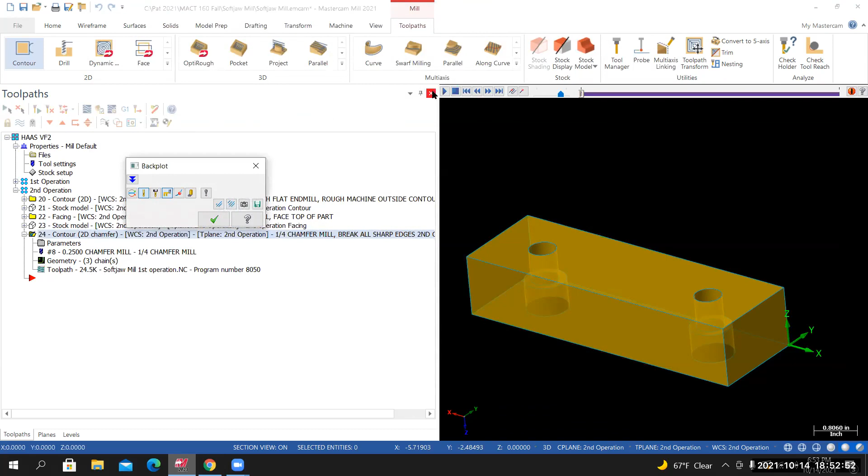Once I regenerate it, let's run it in backplot. It machines the outer edge of the part, then goes into the drilled holes and breaks any sharp edges that might have been created. Everything appears good, so I'll exit backplot.

I'll save my work. I'm going to select the entire second operation toolpath group, and we're going to run this and verify. Hopefully I saved my work prior to going into verify.

Once inside verify, make sure stop condition collision is turned on, and then select the play button.

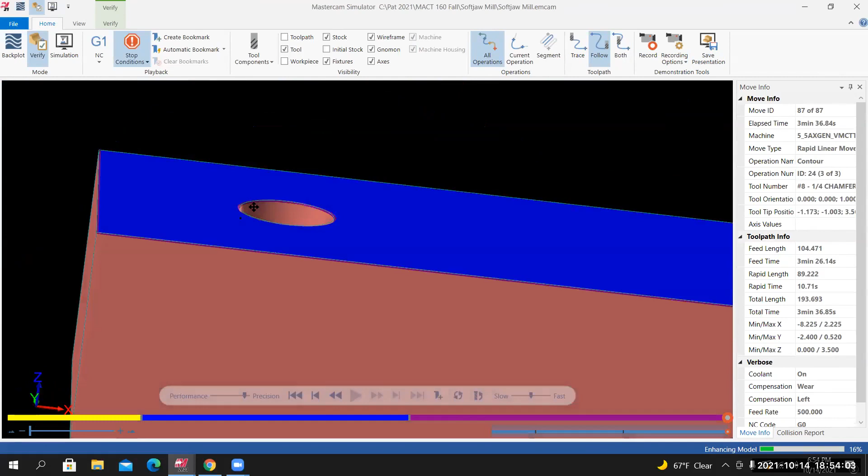Zooming in, I'm inspecting the machined model. You can see that I've got chamfers on the sharp edges. The profile of the part pretty much matches the wireframe representation of the part, so I'm liking what I'm seeing.

I'm now going to save this machine model as an STL file. From the verify tab, save stock as STL. I'll call this Softjaw Mill complete, or finished part, something that makes sense. I think I like finished part better.

It takes a moment to save it. Still saving it.

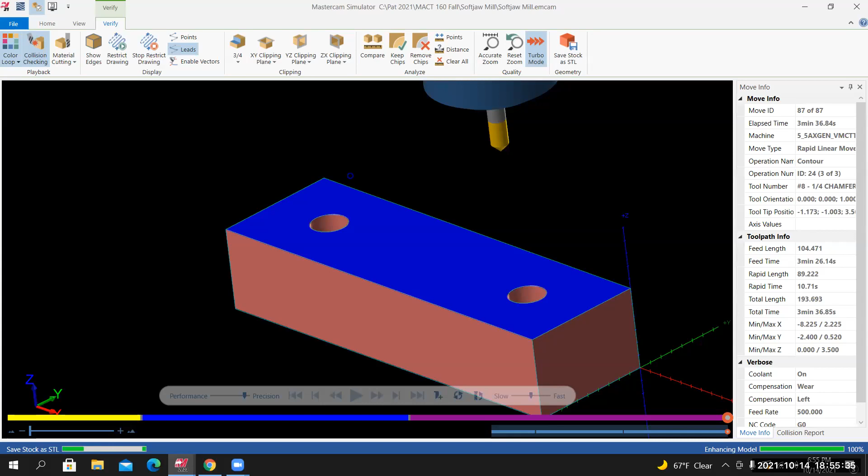All right, so now it's done saving it. I'll exit verify.

If we go back to the project page, it says use contour 2D chamfer. Okay, we did that. It says create the NC file using the post selected operations. So before we create the NC file, I'm going to do this, but I'm not going to go through with it. I just want to show you a few things we need to be aware of.

So if I just select this and select G1, select OK. It says, okay, not all have been selected for posting. That's fine. Post all? No.

Now we need to be careful. It wants to save it as Softjaw Mill first operation, so we definitely want to change it to second operation. But before I even do that, what's going to happen is it's going to save it as program number 8050.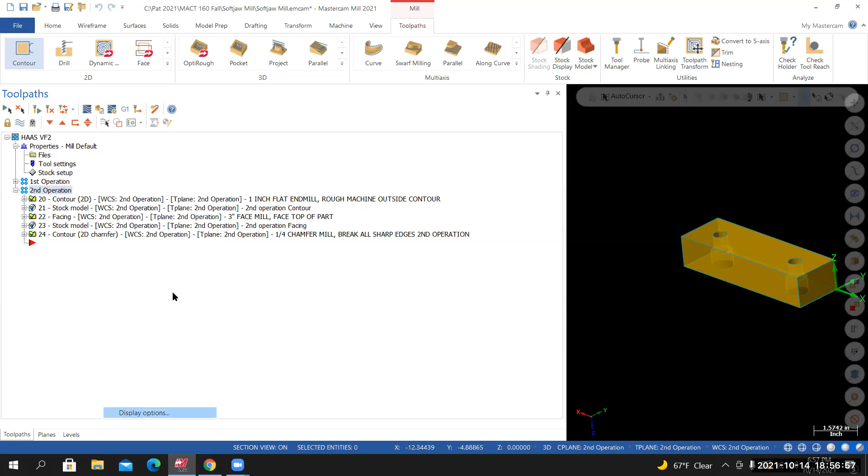And where we can see that, let me expand all this - not seeing it. Let me go to display options, and let's see, operation comments. Okay, so what I'd like to do is rename these program numbers.

So first operation, that's going to be - let me see here. If I right click and go to edit selected operation, change program number, see how it's set to 8050? I want to leave that one alone.

But when I come down here, I want to select these, right click, edit selected operation, to change the program number to something different. So change program number - this will be 8051.

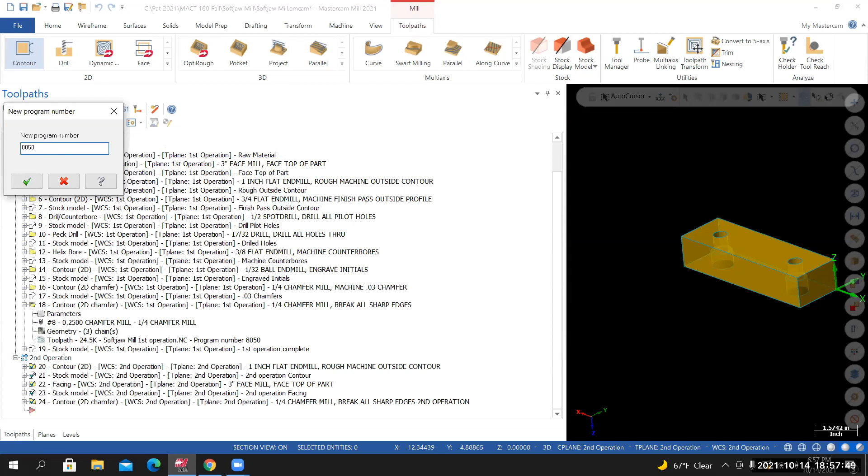And something else, so let me just post this out real quick. With just these toolpaths selected, I'll select G1, select OK. I don't want to post everything because I don't want these part of this program, so I'll select no.

I'll call this one Softjaw Mill second operation. This will also be Softjaw Mill second operation. Here we have 8051 - it doesn't conflict with the previous NC file that we created.

What's happening is it's creating this work offset G54. Now we haven't talked that much about these because you become more familiar with them when you take the 150 class. These are work offsets, and sometimes we want to assign different work offsets to different parts, different operations.

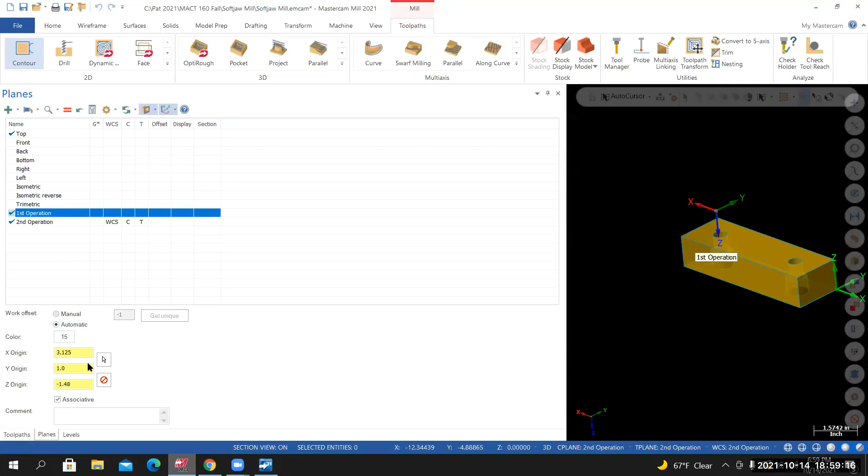For me to change this, I want this to be G55. Inside of this particular machine definition, if I go back in Mastercam, go to planes, here where it says the first operation, I'll select manual, set this to 0, let it update. And then I'll select the second operation, manual, and change this to 1.

Now, when I create the first operation, the default was G54, so right now we're telling it to be G54 no matter what. The second operation, when I create the NC file, it's going to associate all toolpaths with work offset G55. I'll show you what's going to happen when we create the NC file.

So this is G54, and you'll see it being referenced at every tool change, or at the beginning of every toolpath.

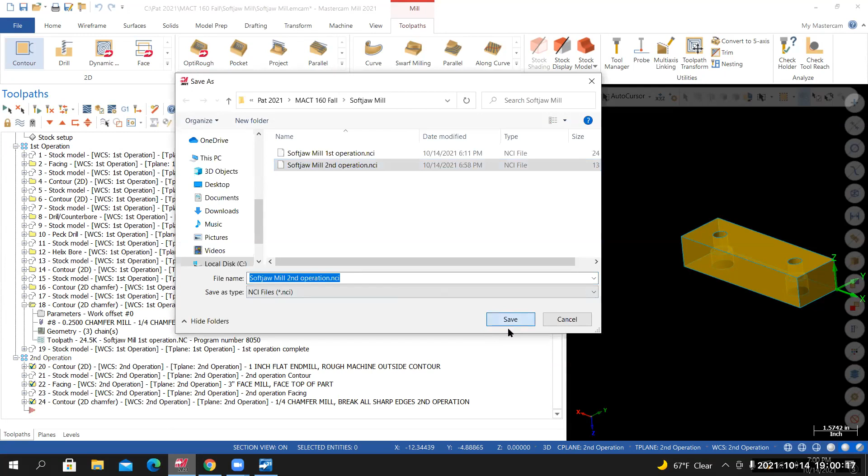Now, because we changed that to manual 1, when I create this NC file, I'll repost it. So with the second operation selected, G1, I'll select OK, and overwrite the existing NCI file, overwrite the existing NC file.

Now, back to Code Expert, it asks us if we want to reload the changes. Watch what happens to this G54 - it's now G55, and that'll turn up at every tool change. So what that allows us to do is have multiple vices or multiple fixtures on the machine.

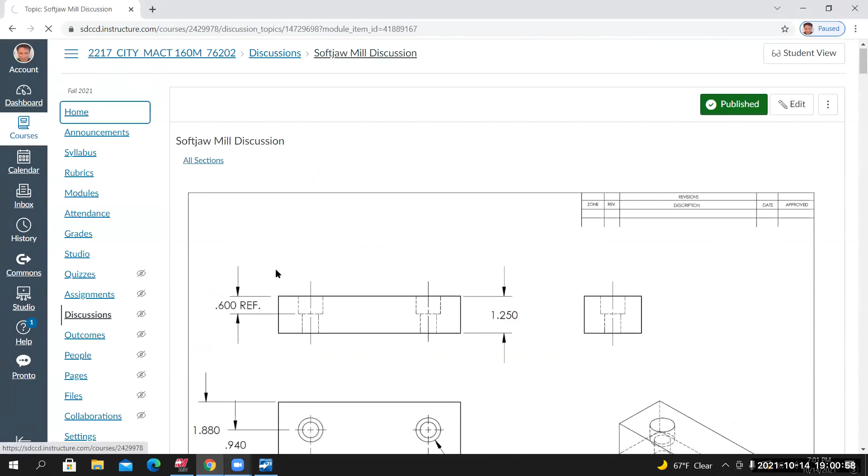So I want you guys to visualize two vices on our machine. The one vice will be holding on to the raw material for the first operation. Then the second vice, say it's to the right of this vice, is going to hold the first operation complete, the part flipped upside down. So this one would be G54, and then the vice next to it would be G55. This is just a way we can set the machines up where we can run the first and the second operation at the same time.

Different ways to do it. I just wanted to show you guys how to introduce different work offsets for different toolpath groups. That's what we see here inside the NC file.

So all of these toolpaths would go to the vise on the right. All the toolpaths from the other program, which are referencing G54, would go to the vise on the left. That's just a simple way to look at it.

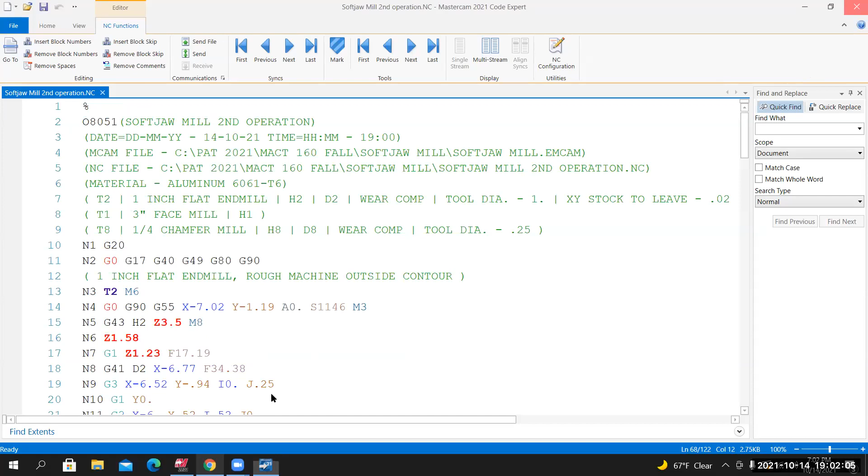So anyway, I'm done creating this NC file. I'll close out of it and save my file one last time.

I didn't create the stock model, so we'll create one more. I'll go to toolpaths, stock model. For the name, we'll call this finished part. For the initial stock shape, we'll use the previous, the second operation facing. And for the source operation, we'll select that last contour toolpath. Select OK.

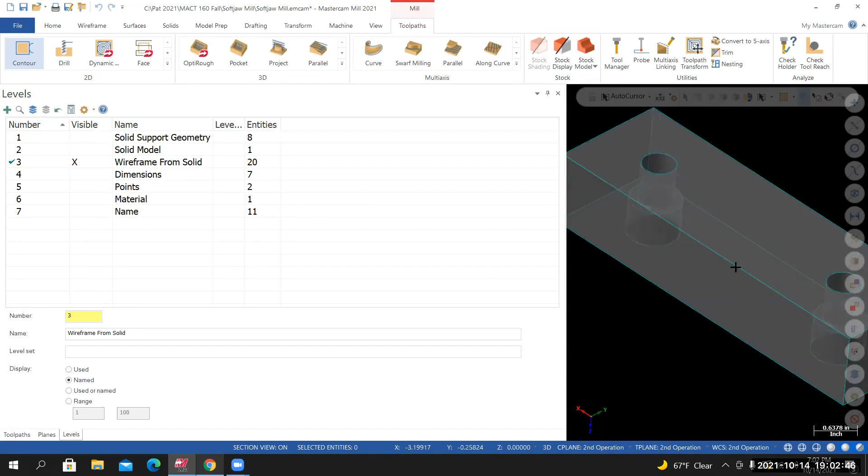If I go back to the level manager and make the solid model level invisible, we're now looking at what the finished part would look like once it's done being machined. This one has the initials in it, and it also has the chamfers or corner breaks all around the sharp edges. So this is a good representation of what would be coming off the machine.

So I'll make the solid model level visible again, and toggle off the visibility of the stock model. I'm looking at it from an isometric view, and I'll save my work one last time.

Now that pretty much completes the Softjaw Mill project. If I go back to the project page, let's go to modules, and then go to Softjaw Mill discussion, all the way down to the end of the instructions.

We've done all of the required work, all of the instructions, all the things we're instructed to do, we have completed. I now need to upload all the required files to Canvas.

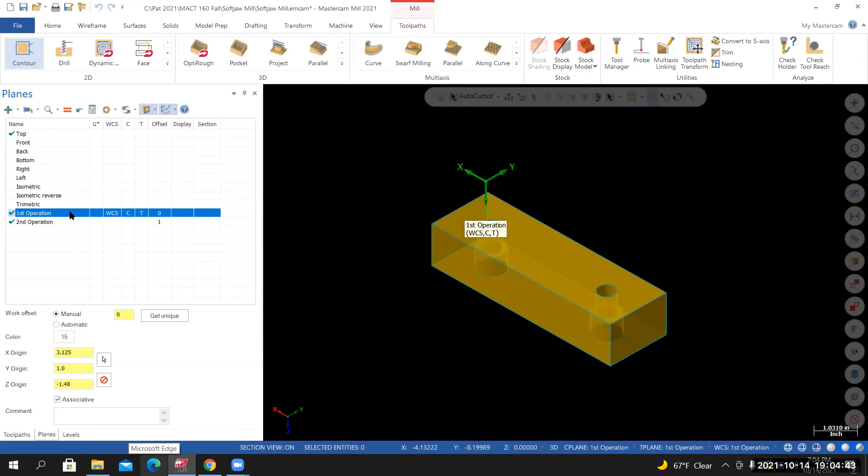If I go back into Mastercam, I'm going to look at it from the isometric view for the first operation. So first operation, I'm in the plane manager, I make the first operation the active construction plane, and look at it from an isometric view.

This is the view that's going to appear in our setup sheet, so I like to set it to my default isometric view, in this case for the first operation.

To create the setup sheet, I'm going into the toolpath manager. In an open area, I'll right click and select setup sheet.

Actually, what I need to do is select, let's do this, this would be a better idea. I'm selecting the machine group, the Haas VF2. Now right click, setup sheet. There we go, we'll call this Softjaw Mill.

Once again, customer: San Diego City College, programmer: put your name here, accept the defaults. I'll select OK.

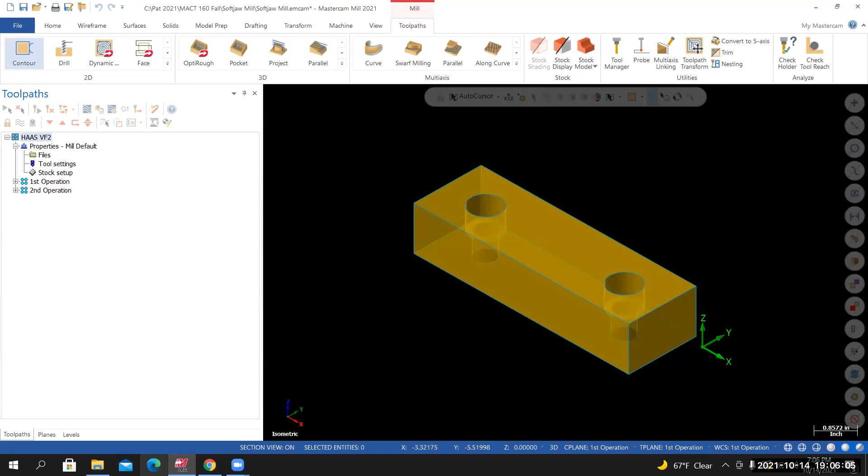Takes a moment to create the setup sheet. Once it's done, it's going to open up in the reports viewer, and then we'll save that file as a PDF so we can upload it to Canvas.

So it's opening up the active reports viewer, and I'm just kind of scrolling through. That's stock from the second operation - don't worry about it, just keep it the way it is.

All right, so looks like everything's there. So once it opens up, you're going to go to File, Save As. You're going to save it as a PDF, portable document format.

Make sure you're saving it in the correct folder, so MACT 160 Fall. We'll call this Softjaw Mill, and we'll call it Setup Sheet.

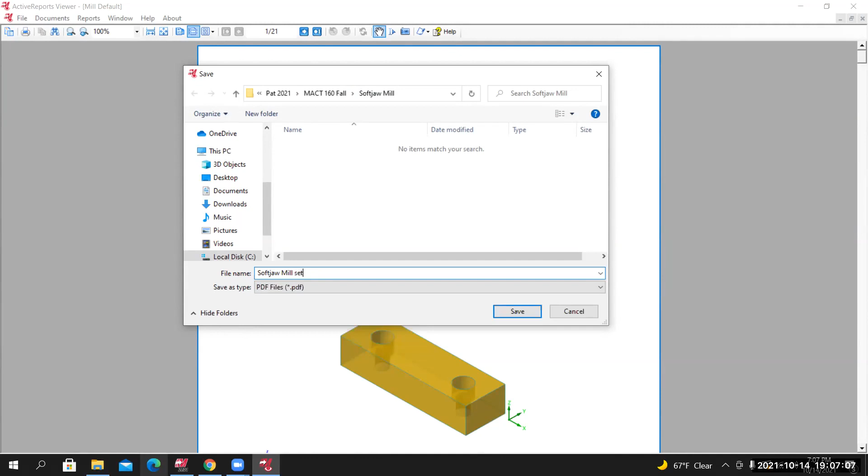Once you save it, go back to the project folder. You can see the PDF is now saved to this location. I'll exit out of, yep, saved. I'm exiting out of the active reports viewer.

So what I'm going to do now is zip this file up, I'm going to compress it. Now, the way my computer works, if I right click on the Softjaw Mill folder, everything that I need is in here. If I right click on it and go to 7-zip, the option I will use will be, let's see here, add to Softjaw Mill 7-zip. Actually, I'm using this one right here, add to Softjaw Mill 7-zip, or just a zip.

Here's a compressed folder. I'll now upload this to Canvas.

I'm inside of Canvas, and I need to look at it from student view, so you're seeing what I'm seeing. If I go to student view, this is the idea, it resembles what you're seeing. I can see what you see. I'm going to go to modules.

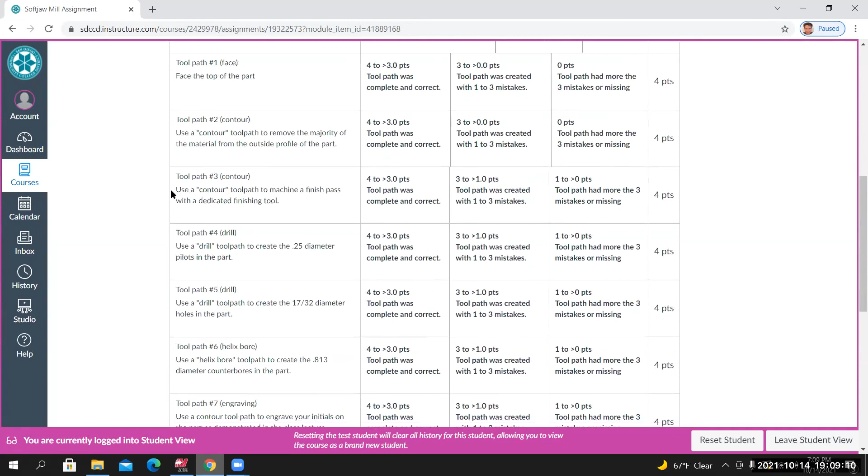Here's a grading rubric. So before you upload it, work your way through this and make sure you've done everything that this grading rubric specifies you need to do. If you've done all of this, you're good. You can select Start Assignment.

When you get to this page, select Upload File, choose File, and navigate to the working folder or the class folder. Inside my class folder, here is the Softjaw Mill compressed file or zip file. Open it up.

Once you have it selected, select Submit Assignment. And here's some type of indicator that we are successful in uploading it. It's submitted. Now you get two opportunities to upload this file.

You upload it the first time, we'll take a look at it, and if any changes need to be made, we'll let you know. There'll be some type of comment next to the different sections of the rubric. If you don't get maximum points, read the comment next to that field. It'll give you instruction on what you need to fix. Go back in and fix it. Once you fix everything, re-upload it, and we'll regrade it, and you'll get the better grade.

From here, I'm going to leave student view, and actually I should go back to student view. Let me show you something. Once you upload it, go to grades.

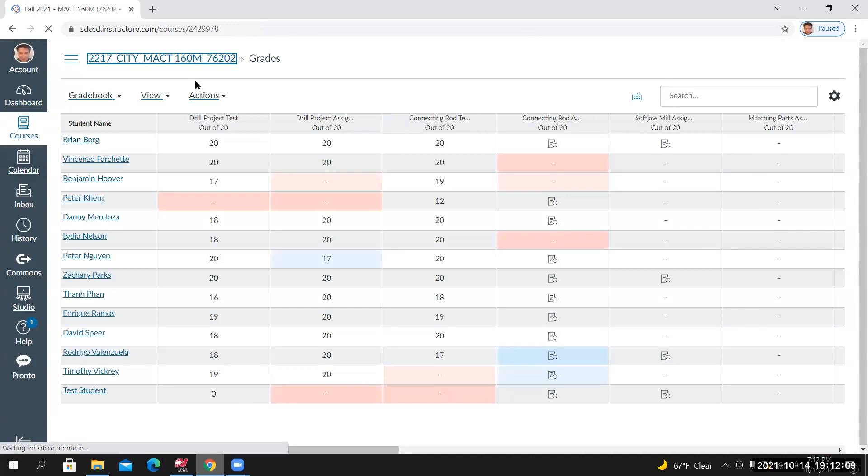So from here, I'll leave the student view. Didn't mean to go there. I'm back on the home page. If I go to the modules...

We just completed the assignment for module 3. You still need to submit the mill assignment, which isn't due until October 28th. On that day, we'll also be taking the test associated with module 3. This is all going to take place after the midterm.

If I go to the calendar, here's the calendar for this class. Today is the 14th, and we're supposed to start matching parts cavity, modeling that one up. We'll probably do a little bit of work with that. I can get through the 2D representation of that part tonight.

But you can see a week from tonight we've got the midterm hands-on. You will be required to come to San Diego City College, the T building, room T195, and use the computers there, the Mastercam that's on the computers there. You're going to work your way through a project very similar to, the midterm is set up to resemble the projects we've been working on.

You're going to be given instructions through Canvas, very similar to what you see on the project page. You're going to create a model of a part, and create several toolpaths. It's nothing you haven't already seen. By working through the assignments we've been giving you, that's preparation for the midterm. So if you can do all the assignments I've done up to this point, you'll be fine.